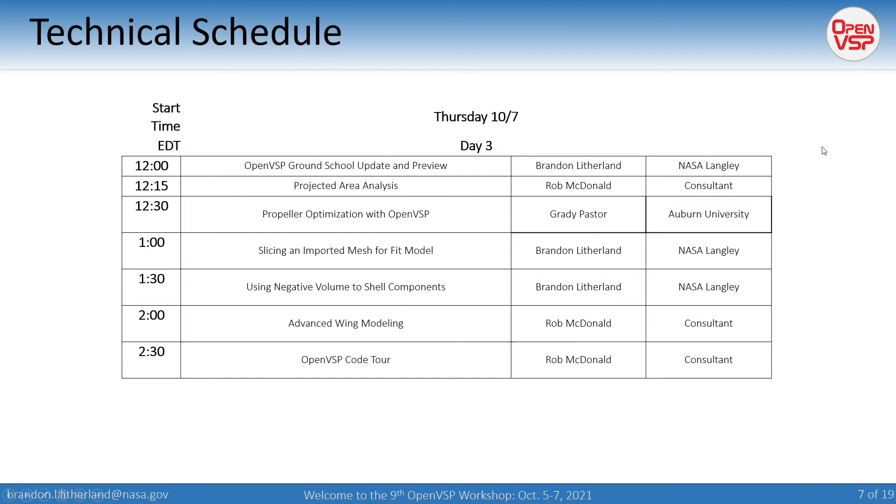And with that, I'm going to go ahead and start walking through the slides, and Rob McDonald is going to take over for an OpenVSP overview and talk about really what it's for, what it does, and where it fits in the design process.

Thanks, Brandon. Can you share your slides through Teams so I can see them live? That looks great. Thank you much.

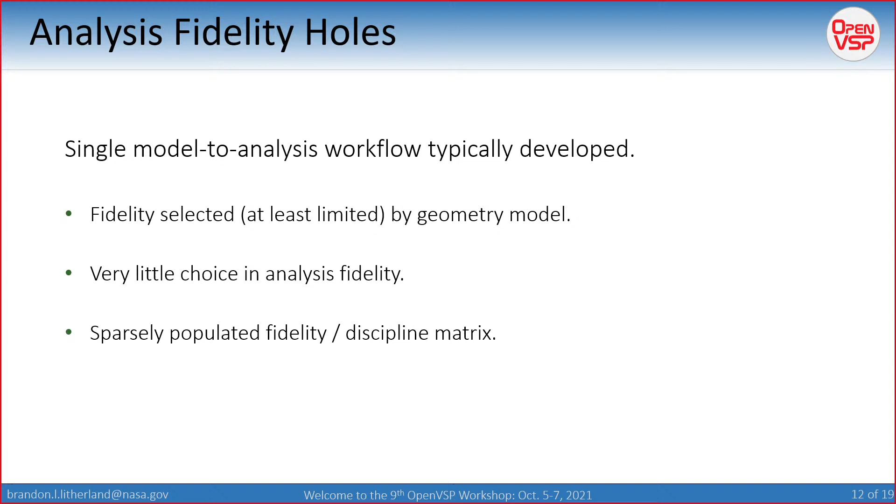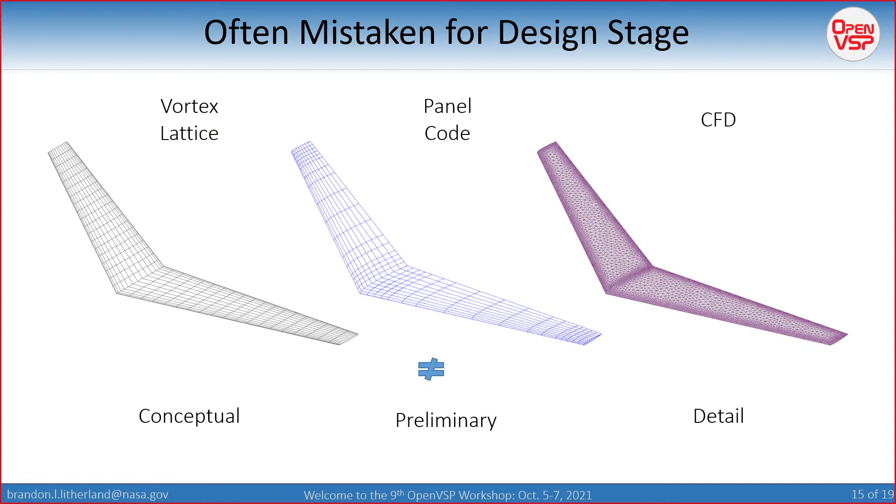Instead, what you should think about is what design phase you're in, whether it's conceptual, preliminary, or detailed design. It's not about how the decisions are made, right? It's not about the fidelity used to make the decision and to inform it. Instead, it's about what decisions are made. During conceptual design, you're making these bulk, big bone decisions, primary wing layout, what are the mission requirements, how are you going to achieve this?

In preliminary design, you're nuancing things a bit more. You're deciding exactly the structural layout. You're nuancing the twist of the wing and maybe the camber of the wing. All the way to detailed design, you're lining up rivet holes. You're doing composite ply layouts. You're designing tooling, manufacturability. So you're making fundamentally different decisions in these processes. That's what changes through the design phase, not fidelity. Fidelity is an independent axis to this process.

And obviously in VSP, we're focused on conceptual and somewhat into preliminary design, but we're also focused on letting you have all of the different fidelity tools that you need to make the decisions that you're making. Next slide.

So OpenVSP is a parametric tool, and we come from a place where those parameters are the geometry truth, right? They are the ground truth. That's really where we start. And so the concept, that idea, this is a wing, this is a NACA 4-digit airfoil, the aspect ratio is 8, right? Those ideas, that is the geometry. And everything else is a representation. And parameters work throughout this process.

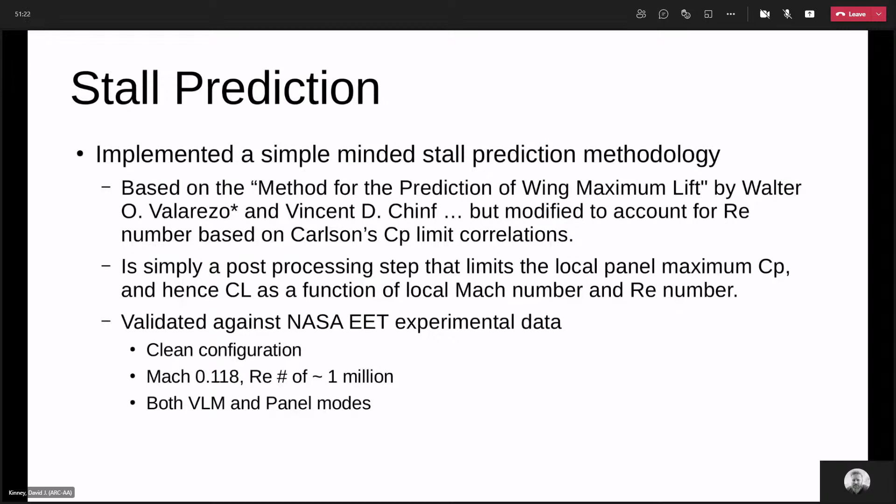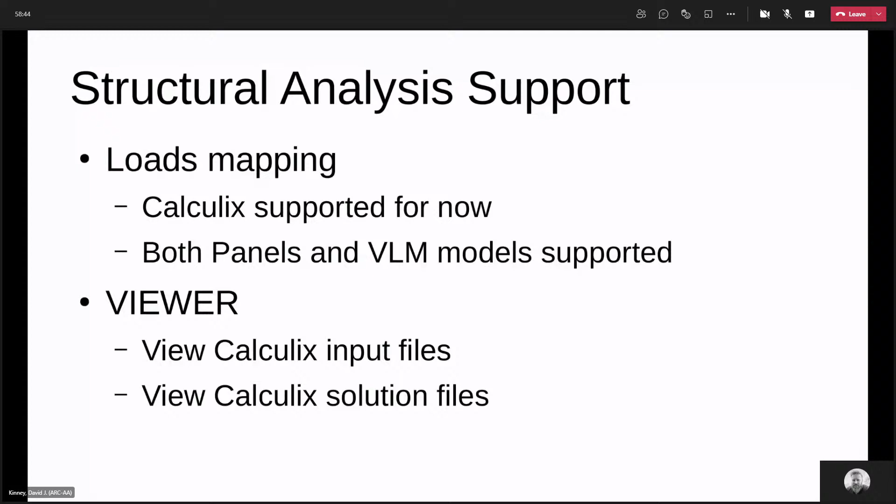So just as an example, grab the EET again. We just went through a default setup, not anything really to compare to here, but just trying to show the process. We've actually done a bunch of internal use of this on other geometries, and it generally does a really good job compared to other codes using Nastran and higher fidelity CFD.

So I modeled up the EET just looking at the wing. Basically skins, ribs, and spars were modeled. I don't know if someone's going to talk about this in the workshop, but if you're interested in the details of the FEM modeling, I'm sure there's a slot for going over that this week.

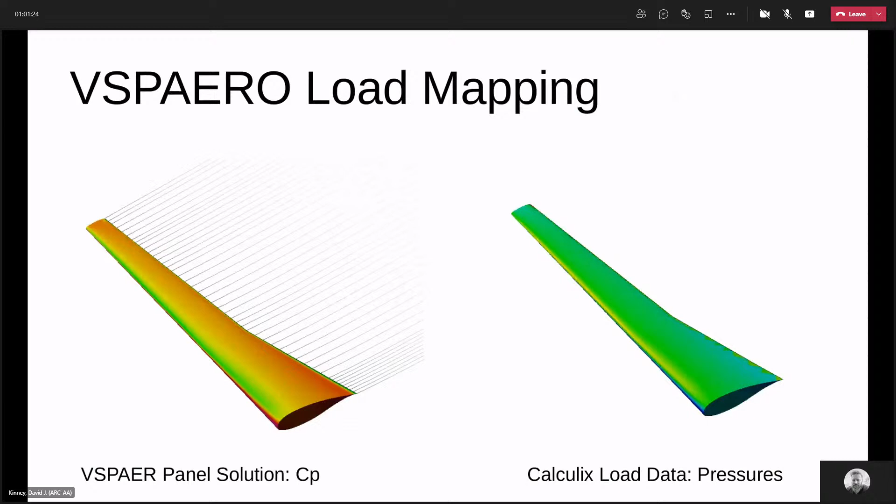Once you've done that and set up a number of other things within Calculix, all of which we've added, like finding the symmetry plane points and adding boundary conditions so your wing doesn't fly away when you apply a load and run it through the solver, there's a bunch of other things we've done to allow you to tie multiple FEM models together.

We've done this with a strut-braced wing, where we had the wing, the strut, and a brace all modeled up in OpenVSP, all modeled within the finite element tools within OpenVSP, and all had loads applied to them from VSPaero, with the structures tied together. We have a number of different tools we'll include here in the future to allow you to do all of that.

So it's a fairly easy process now, at least for a single wing, to run VSPaero. Once you've got your finite element geometry modeled up in OpenVSP, write that out, do the load mapping, and then run Calculix. Presently this all has to be done on the command line, but I expect at some point this stuff will get rolled in, so you'll be able to do this all from the GUI.

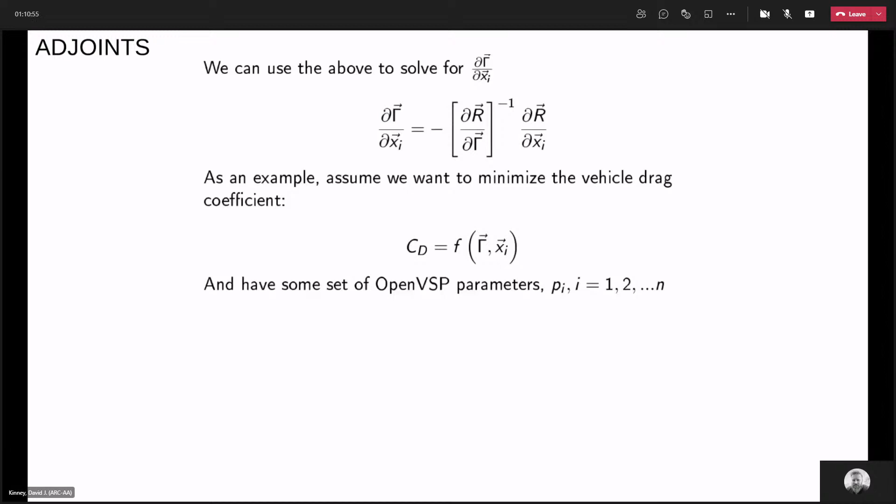So we can take the derivative of CD with respect to the mesh, so dCD dx. That's just, again, chain rule, kind of like we did for the residual. So you get partial CD with respect to x, that's the change in the drag with respect to the mesh change. And then you get partial CD with respect to gamma times d gamma dx, and that's the change in the drag coefficient when you change the solution, times the change in solution with respect to a change in the mesh.

We can basically rearrange that where we can get rid of that d gamma dx, because we solved for that previously when we looked at the derivative dr dx. So we can replace that d gamma dx term on the right-hand side with the dr d gamma inverse times dr dx. And then we can rearrange things a little bit, just combine the first two terms into a term, and we have that dr dx there. So now we have something that looks even more complicated than we started with at the top of this page.

And I'm going to define that stuff basically in the brackets there as psi transpose. So psi is a vector, and that whole thing inside the brackets, if you look at it, is basically a vector times the inverse of the matrix. And so it's a vector, and we're going to call that psi transpose. So we've defined psi transpose, like I had there at the bottom of the page.

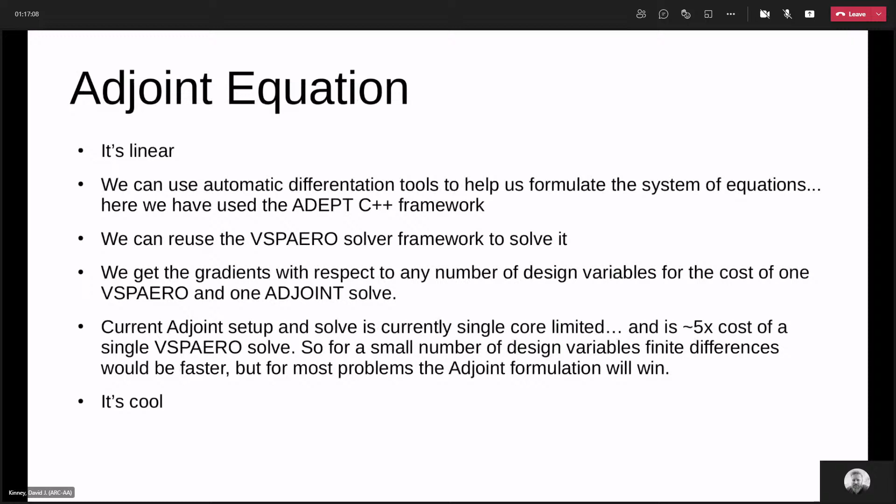So the test case, just a simple wing, incompressible, Mach 0.01, 5 degrees angle of attack. Stuck the CG up there near the nose of the vehicle, so by definition, it doesn't trim. I'm running this in VLM mode. It will work for both VLM and for panel mode. Really, there's no difference in the setup or run, just in the run times; it's just easier and faster to do VLM. Obviously, using the adjoint solver for the gradients.

So the design variables, I have 9 sweep values along the span, 9 twist values along the span, 9 dihedral values along the span. So there are 27 design variables. So if you were doing this with finite differences, you would have to run the solver once at this Mach 0.01 and 5 degrees angle of attack, and then you would perturb all of those design variables one at a time and run 27 additional solutions for a total of 28 VSPAERO runs, per optimization step where you would need those gradients.

I threw together just a simple Python-based conjugate gradient optimizer, and I'm using a penalty formulation to minimize this functional here that I list out. So it's basically CL minus some CL required, which was set to 0.5, squared, plus CM squared plus CD squared, and then A, B, and C are just these penalty function weights. So if, let's say, B and C were both 0, then your functional would just drive CL to CL required, and that would be the minimum of F.

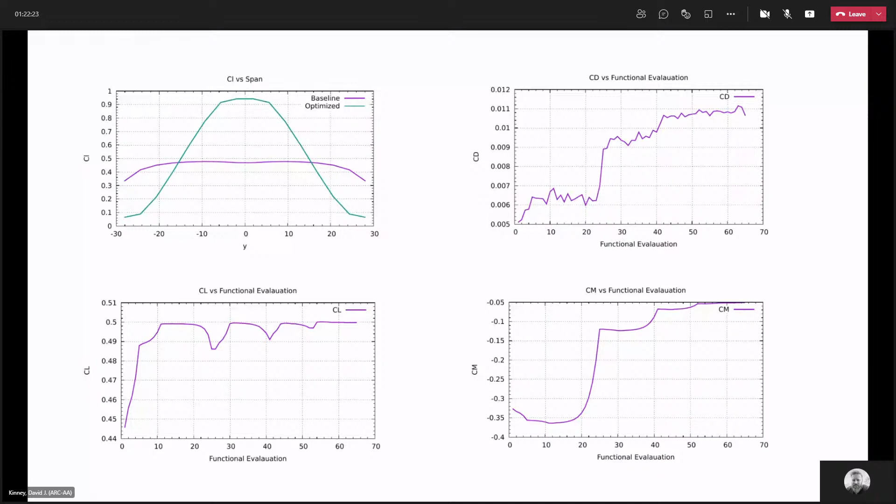I'll let this play a little bit here. So this is just an animation of the optimization process. Within Viewer, you can load in all of the intermediate solutions during the optimization process, at least as I've coded them up for my simple Python script, which we can include in the distribution in the future. Just showing what it's doing. So initially it really goes after the sweep. Then if you look at the tips, it's playing around with both the dihedral and the twist.

This is not meant to be the end-all in terms of optimizers. I just wrote a very simple conjugate gradient optimizer in Python. There's obviously a lot of much better optimizers out there. This code is actually being pulled into NASA's OpenMDAO framework, which I don't know if anybody's going to talk about this week, but OpenMDAO is also open source. It allows you to tie together any number of models in a framework that allows you to do optimization. One of the optimizers they have is SNOPT, what I'll call a real optimizer, where you can actually do optimization with constraints, and not just a simple penalty formulation like I've done here.

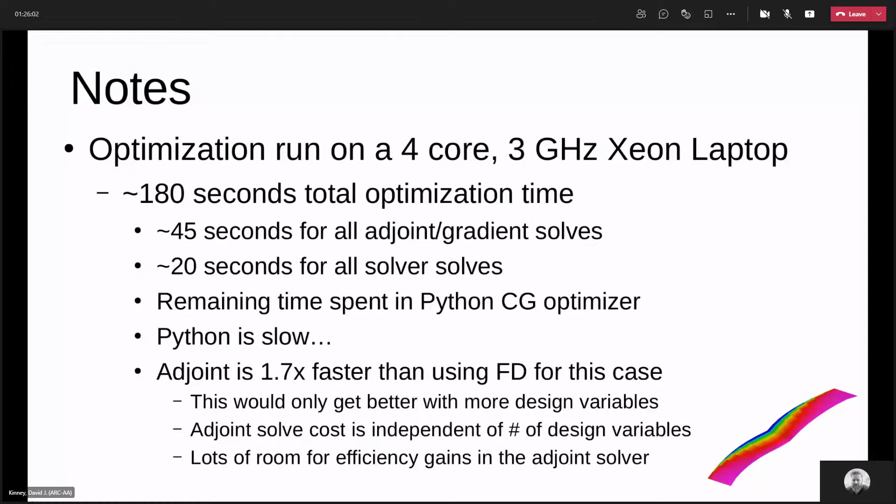Okay. So my final topic, and I think we're doing okay here in time, things that go round and round. In the past, there were 2 ways to model rotors in VSP. The actuator disk model, and it was fast. It's really developed for propellers, not for rotors. And it really doesn't work for edgewise flow.

I mean, you can run it for edgewise flow, and if you're not totally edgewise, then maybe you'll get a reasonable answer out of it. But the theory really was not developed for edgewise rotor type flows. It's based on basically flow coming in normal to the actuator disk, and so anything even at a slight angle of attack is kind of breaking the assumptions in the underlying theory that went into that model.

The other way that you could model rotors was the unsteady analysis. It's not so fast, at least compared to just a single steady state solution. But it works for propellers, it works for rotors, it works for those in combination with wings and bodies. So it's fairly general, and within the framework and theory of the vortex lattice and the panel methods, it seems to do a decent job. But it is expensive compared to running a single VSP solution, say with an actuator disk.

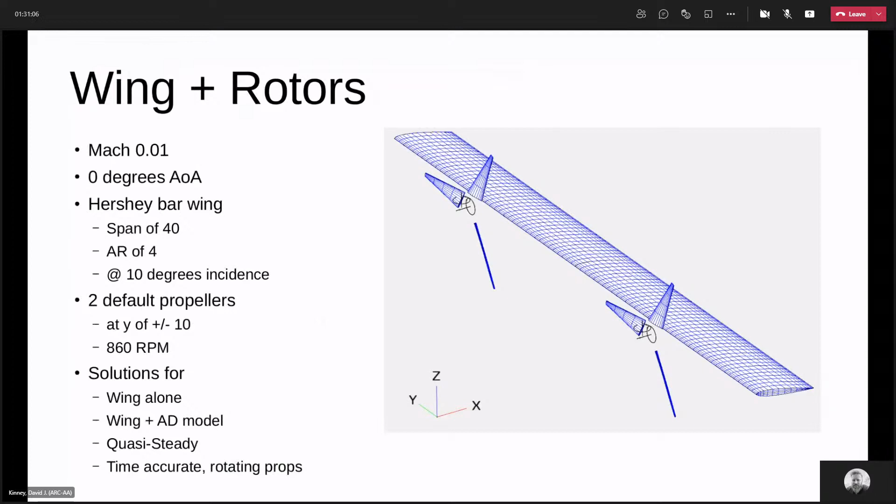I've been playing around with just how many points along the span of the rotor blade you need for these quasi-steady runs. In general, I found it's less than you'd want to run for the time accurate solution, in terms of that pain-benefit trade-off.

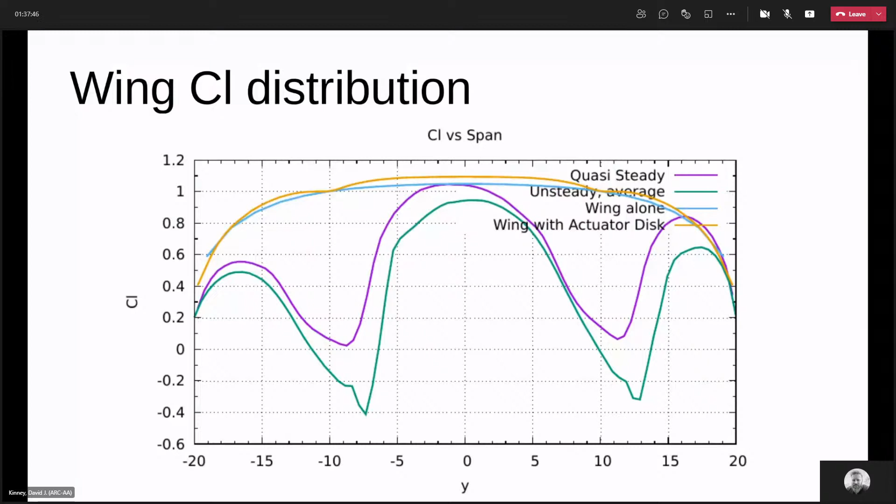If you look at the wing forces and moments, we don't do quite as good as we did for the propeller case, but we're clearly doing a heck of a lot better than we did with the actuator. So the CX, CY, and CZ are within 30 to 50% of the actual values.

But I think you need to look at those as deltas from the wing alone to understand that if you're looking for trends, which I think at this level of analysis and conceptual design is probably what you're looking for, it actually provides you some very useful information. Specifically something like CMY, the trim, it's acting in the right direction. So it's definitely showing the impact of those rotors on the wing in terms of trim, as well as in terms of the forces.

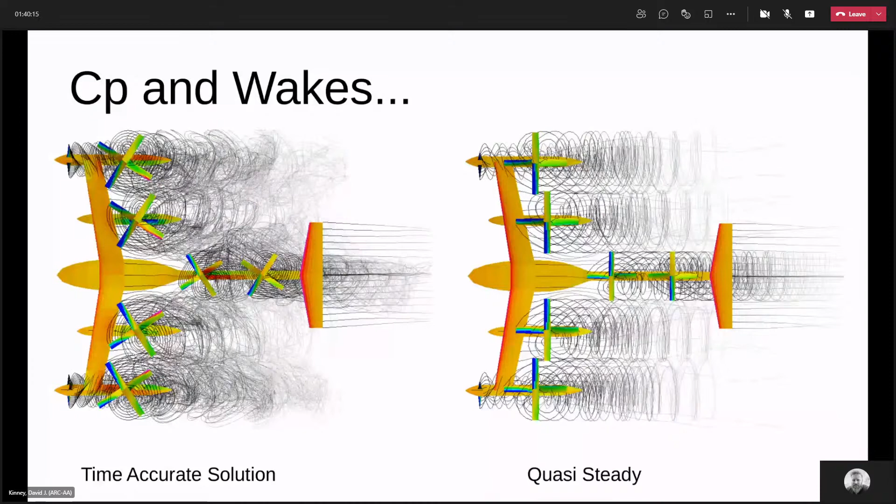From a load standpoint, this is by far the worst solution you've seen today in terms of comparisons. You've got the unsteady average up top, the wing alone near the bottom, and quasi steady is kind of splitting the difference.

But if you look at the integrated force and moments, we don't do bad. You look at CX, CY, CZ, all the trends are actually there, and they're actually fairly close. CZ is off by maybe 50%.

CMY, which is probably the big one in terms of trimming the vehicle and trying to understand the impact of rotor RPMs and how you're going to trim this vehicle, is actually scarily good, probably better than it deserves to be. Again, you want to compare these all to the wing alone solutions. So CM, it's pitching down and it's pitching up, right?

Obviously these are just the forces and moments on the wing. These would be traded off with the thrust and the forces that are occurring, with the delta pitching moment caused by the thrust. So you trim this vehicle out with the rotors.

So that Uber case, 12 rotations, I really ran that one out. It was like 5.5 hours on my laptop, and the quasi steady was 7 minutes. So I think for what you're getting from the quasi steady solution, the trade-off in time is quite worth it.

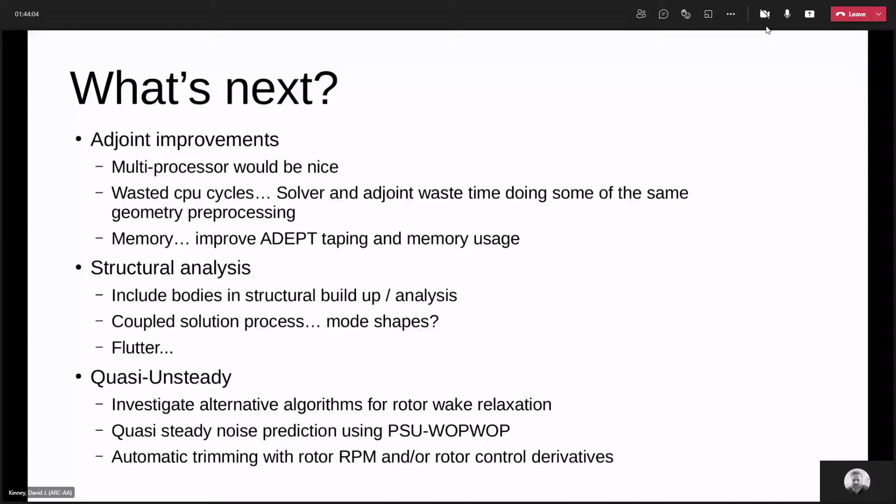So first, what does the CLMax variable do in the input file? Is it still supported given the new stall prediction tool? What should you set that to if you're using the new stall predictor?

Yeah, if I turn my camera on, you'll just see my dog. So if you're editing the .vsp file by hand and you set CLMax to -999, it will kick in the new CLMax. Okay, so CLMax -999. And otherwise it operates the way it always did. Yep, great.

Would you give an answer about the logic of when a DegenGeom file is used, when a VSP geom file is used, and when a tri file is used, and how it picks?

Yeah, so it depends on what's in the directory, and I'm going off the top of my head, so it's probably not perfectly precise. But what it should be doing is: if you've got a VSP geom file, it should take that first - whether that's a Vortex Lattice model or a panel model, it should grab that. If it doesn't find that, it should look for a tri file and load that in. If it doesn't find that, it should look for the CSV file for the DegenGeom. So that is essentially the order.

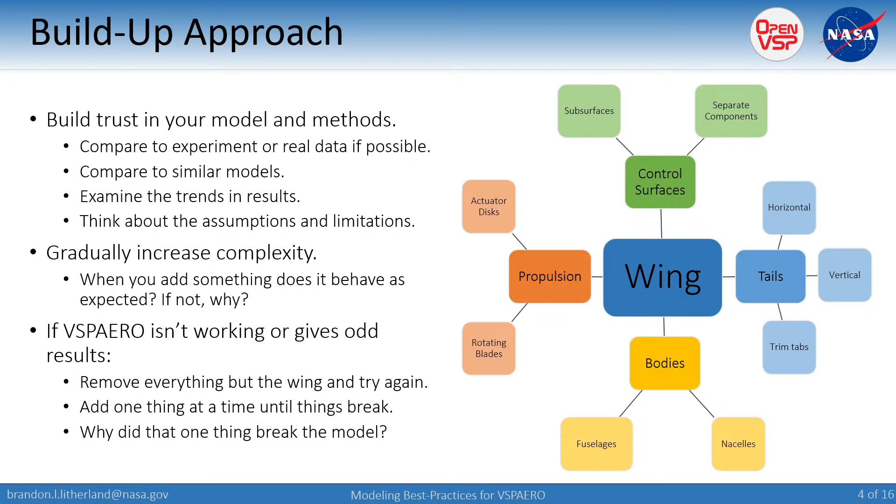So again, if VSP Aero isn't working, it's returning a not-a-number or giving you weird results, take away everything but the wing and try again. Add one thing at a time until things break, then figure out why it broke and what it was about that completely screwed up the model. In some of these slides, you'll find things to look for when you query your model.

As general best practice, you can use clustering to your advantage to improve the solution, or at least give the solver a way to calculate information where stuff is happening. For example, you can give it more points out at a wingtip where you'll have a larger drop off in the lift curve. That's typically going to give you a more accurate solution than leaving everything in uniform spacing. If you have a lot of points, it's probably going to give a decent lift curve, but it will cost more time. This way, you're giving it fewer nodes compared to a completely uniform solution, but still capturing information out at the tip.

So for a single section wing, you can use a root gradient or root strength of say 1 or 2, and out at the tip something like 0.2 to 0.25 is pretty typical, where you can get more information out at the wingtip.

For a multi-section wing, however, you can set the clustering near section breaks so that neighboring cells are similar. You don't want the end of section 1 to have a bunch of tiny high aspect ratio sliver cells and then jump like 2 feet - those two side by side aren't really going to like each other very much. So set these reasonably close together, and add a little more cell density behind something like a propeller, so that where all the interesting stuff is happening on the wing, the solver has enough panel density to capture those effects.

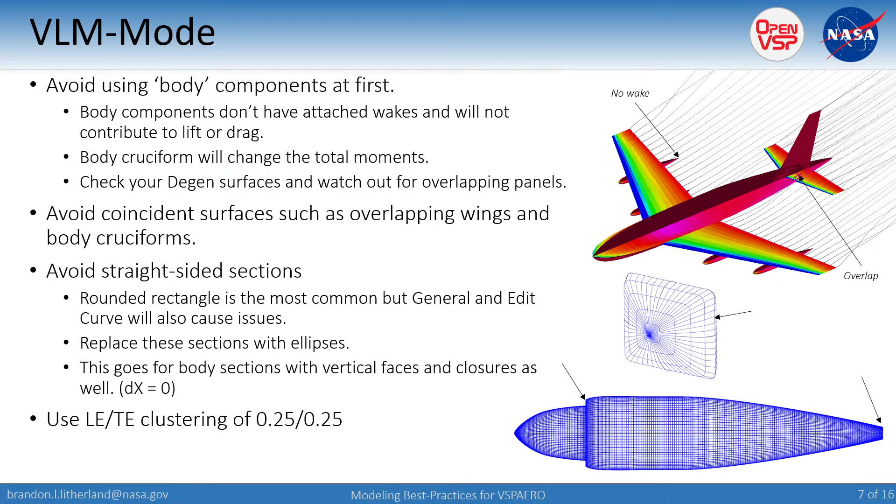But even a very small offset of these distances, for example if I'm working in feet, something like 0.02, is more than enough to make sure these crashes don't happen and it will run just fine. For VLM wings in particular, when you have control of leading edge and trailing edge clustering, use about 0.25 at the leading edge and 0.25 at the trailing edge—that's typically accepted good clustering of points at the leading and trailing edge for VLM mode.

Moving on to discuss panel mode, you'll notice that you can't use blunt trailing edges on wings or bodies. But what you can do to help this along is change native blunt edges to a sharp edge using something like closure or caps.

So you can sharpen the aft-facing body surfaces by adjusting coincident sections slightly—that's more of what we were talking about with that nacelle. Just shift those sections a little bit, and then you should be fine.

When we're talking about clustering values for panel mode, it's usually better to do, say, 0.25 or even 0.2 at the leading edge, and leave the trailing edge value at 1. That way you have some nice distance between the closing section and the next one, giving it a nice sharp edge to attach a wake to.

With the images here, we're looking at a few different ways you can adjust the airfoil. The flat cap that you see is going to cause failure when you try and run VSP Aero. But if you put an edge cap on there, it extends it very slightly—it doesn't really affect the chord length, even though it does just a little bit—but it will run just fine, and you still maintain the upper and lower cambers, upper and lower surfaces of your airfoil.

If you're using closure, you can skew both, or maintain the upper surface distribution by skewing the bottom, but you want to set that to 0. If you skew both, the camber line is maintained. If you skew the bottom, it's going to bring the bottom surface up, but the top surface will be effectively unchanged. It's kind of up to you how you apply that.

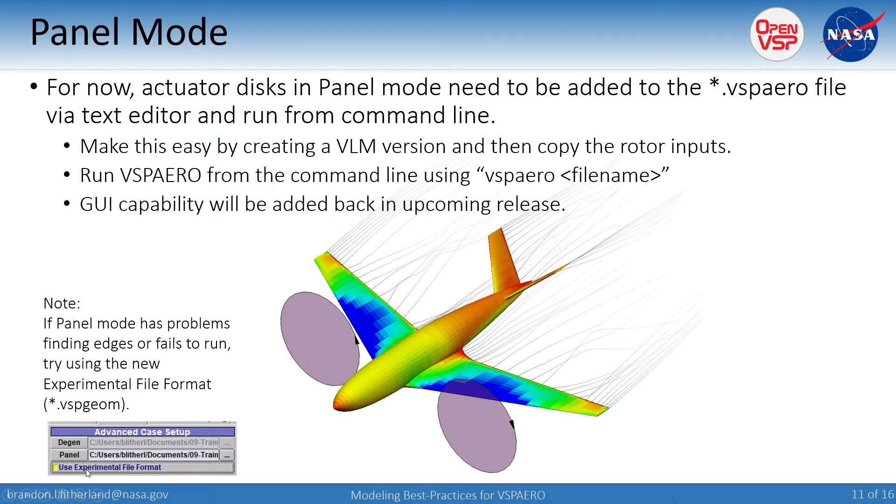Not quite sure why exactly that happens right now. It's more something that we're digging into, but just in case panel fails and you know that it should run, try VSP geom by turning on this experimental file format button in version 3.25.

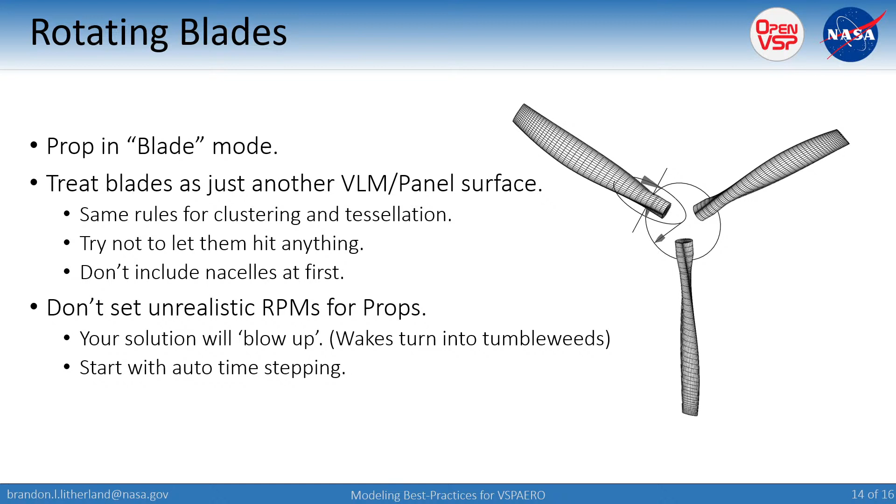So we're here at 2 o'clock. I've got just a little bit to go through here, and then we'll roll into VSPAERO demonstrations. But I want to give you guys some tools that you can use to troubleshoot. And Viewer is really great for this.

So the idea here is you open up Viewer and you take a look at something like the pressure distribution. And you're looking for things like large peaks. You can check the legend to see what those extreme values are, both in, say, the upper and the lower value. If you see things that are completely unreasonable here, it tells you that there is some cell involved in the solution that's causing problems, and you need to take a look at it.

You can also look at the wakes and see if you're seeing the roll-up move as expected, if you're seeing, say, control surface deflections cause the wakes to dip down like they should. And even if something is missing, if you intended to have a tail in the model and then you pop in and for whatever reason the set didn't include that component and your moments look wrong, check the Viewer. Make sure all of the components that you intended to run with are actually in the solution.

Something that can occasionally get brought up is people will look at the Viewer and say, well, why do my control surfaces look like they're in a completely different spot than what I prescribed?

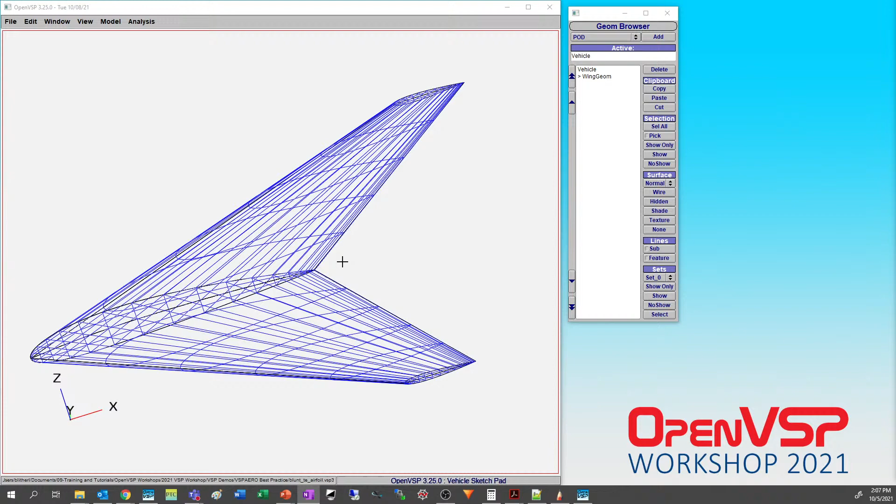In this demonstration, we're going to talk a little bit about where that blunt trailing edge airfoil can come from and how you can avoid it, and we'll do a bit of a live demonstration on how to alleviate some of this. So what I've done here is I've loaded in an airfoil from Xfoil that's basically a NACA 2412, and this airfoil automatically comes out with about a 0.2% trailing edge gap.

You can see that here if you go to the Modify tab. The closure automatically calculates what this is, so it's relative 0.00252, but in reality it's about 1/100th of a foot in the length units that I'm using right now. So it's definitely there.

Kind of like we talked about in the presentation, we can change this from flat, and we can either go to round, which lofts it around like that. But if you want something nice and sharp, you can go to edge, you can go to sharp. You can see there's a slight difference in how exactly these little tessellated bits are being applied, but edge is usually pretty good.

And then you can do things like adjusting the closure. So if you don't want to play with the length, where you can adjust how this is, or even set it up or down using offset, let's say we go back to flat, we can then adjust the closure here, and instead of 0.01 in absolute thickness, we just drag it back to 0. You can see that it adjusts the upper and lower surface and collapses that down to a single point. That is now a sharp edge all the way along back to this point.

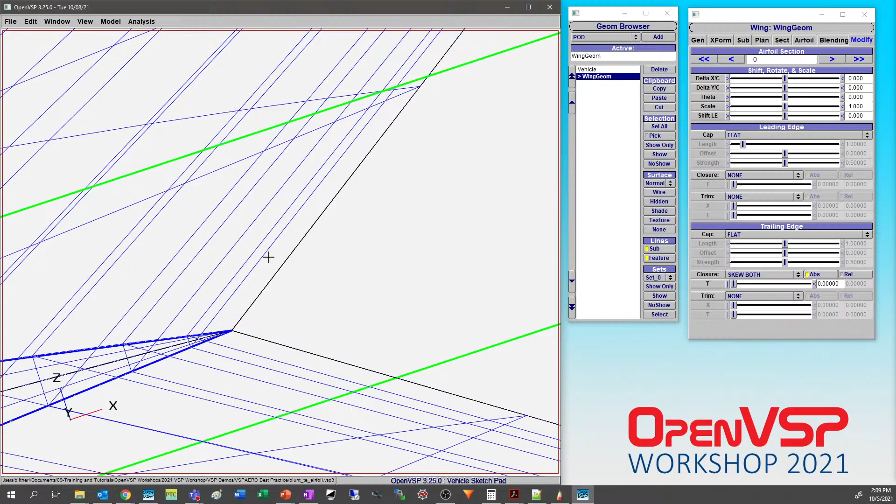Let's see. In the meantime, we can take a look at one of the others that I wanted to show you. This is a bit of a dual demonstration. So we've got a basic wing here.

I've given it about 21 sections, and under the plan tab, we're going to make sure that our leading edge and trailing edge clustering is good. And then we're going to give this some clustering out at the tip, so let's set that to 0.25. And very quickly, we're going to run VSP Aero in VLM mode for just 1 point, just to get the point across. We don't necessarily have to set anything else up. We're going to use the shown set and run it.

So it's going to run real quick, no problem. And what we'll notice here is the loading looks good, but you'll see that there's this gap right here in the middle. Now that's perfectly normal, because in VLM mode in particular, you'll see that each of these loads are being calculated in the middle of the strip. And so it's treating these as the one on the right side and the one on the left, so it's not giving you any information at all about this in the middle.

So it's okay if you see this and that these lines aren't connected. Just know that it's plotting all of these points together in a line, because that involves the right-hand surface of the wing, the other side's the left-hand surface. So don't be bothered about that little guy.

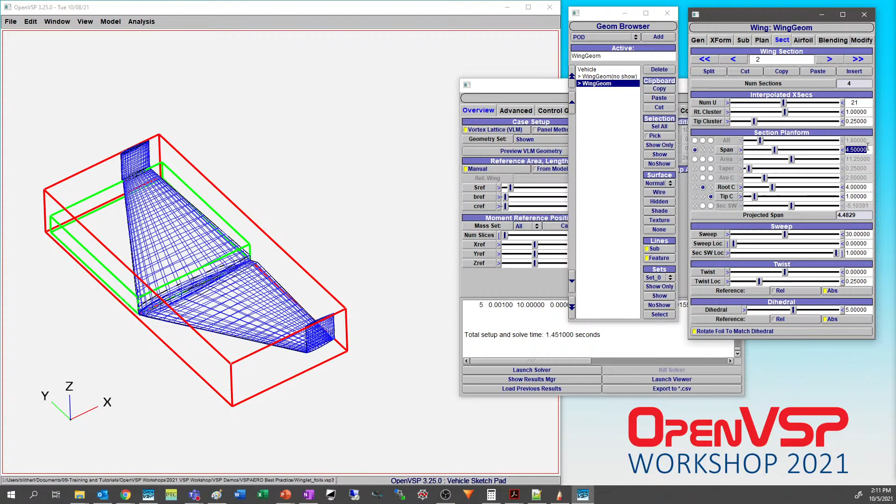Now if we screenshot this to keep it in mind, and put that over here for now, we're going to do another demonstration where we do some winglets. I'm going to show this, no-show the other one, and bump the size of this out a little bit so we can watch what happens when we have winglets on this.

So if I press R and pick a point to rotate around, that's what that looks like. And that's not going to work very well.

So if I were to use the shown set and launch the solver, you can see it's already having a hard time, lots of iterations to try and get down, and you'll see stuff like this. This is an indicator of a bad solution, because there are these giant peaks where something has gone very wrong. That's one of the things you can use to identify where these problems exist.

So if we take a look at that in the viewer, I'll bring this over here so you can see what's going on. If I show the pressures, you can see there's this really nasty pressure spike right over here, so it's causing all sorts of issues.

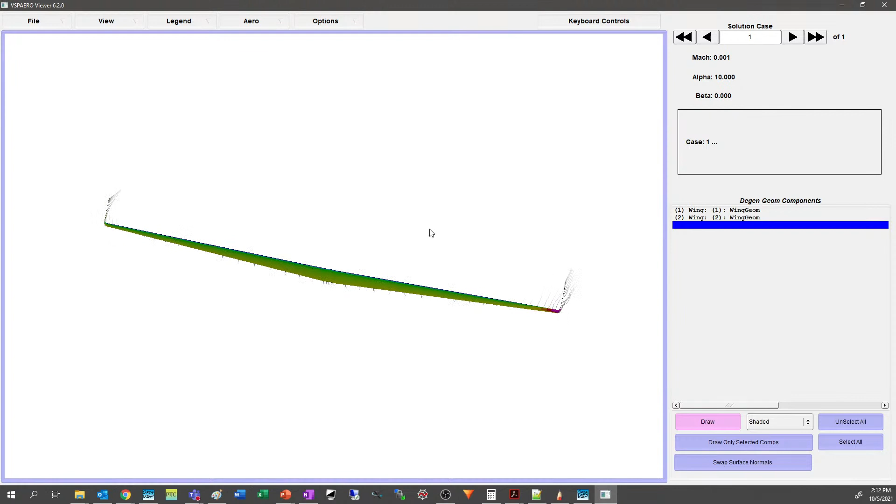If we show trailing wakes, I didn't set it to where it should extend these further out, so you can set far distance to something like 100 to really get this to roll up. But on one side it seems relatively well behaved, while on this side it's actually throwing them outward. So already you can tell there's something wrong with this.

So if we come back in here, rotate the foils, and take a look at this again, now you can see that the foils are all rotated to be effectively normal to the surface here, following the dihedral, bending around, and this has some thickness. You'll notice out here in the corner that OpenVSP is trying to make sure these are all normal, kind of blending it in as you move along. That's okay—I know it's not the absolute full thickness of the airfoil that's supposed to be there, but it captures pretty much all of it.

So if we go ahead and launch again, we should get something that looks quite a bit better. Now this is more like it. You see we don't have any of these weird negative peaks down at the bottom. We have a section of the wing where there are a whole lot of points being computed effectively out at the edge of the span, but we knew that. Still, you can see that the distribution is relatively similar.

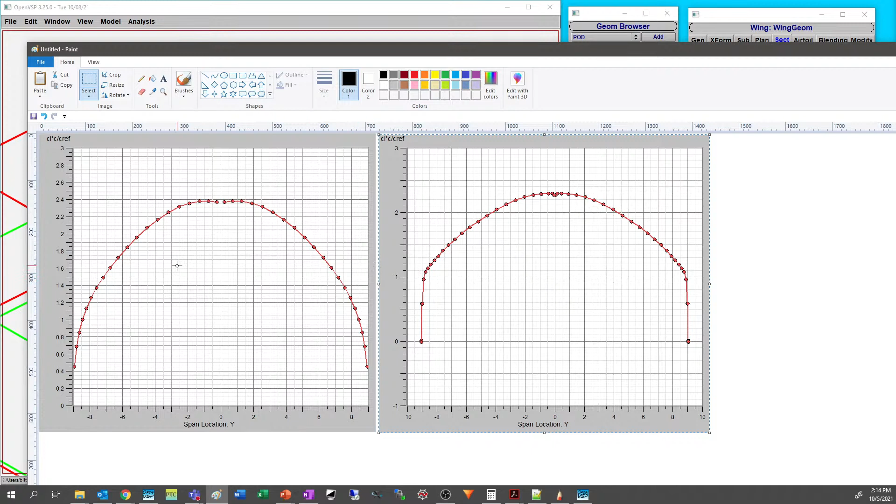And if we were to launch the viewer and take a look at this as well, you'll see that the pressures are all nice and even, and the trailing wakes are all well behaved. Looking at that, there aren't any weird pressure spikes, and if we take a look at the contour legend, this is all order-of-magnitude expected behavior, especially here in this primary region—we're only going from about 0 to a ballpark of -2. So everything is looking good there.

Let me back out of this a little bit and clear up my workspace so we can talk a bit more about this.

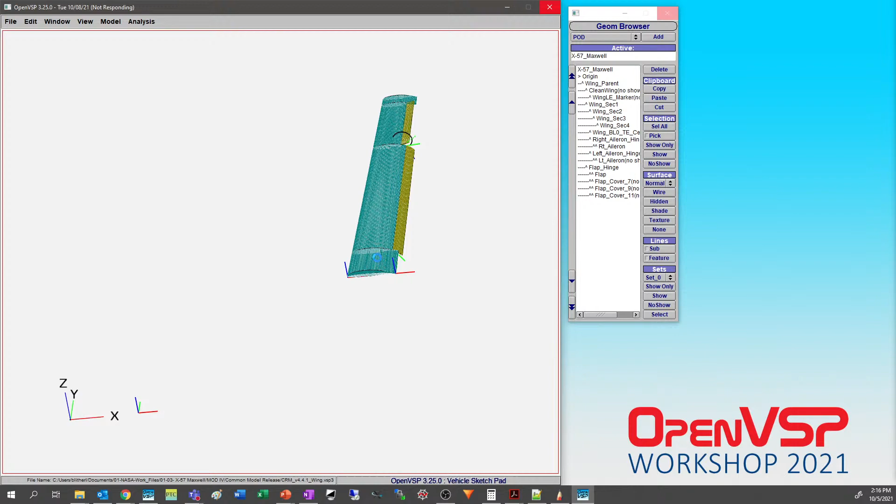Part of the reason this model takes so long to load into OpenVSP is because there are a whole lot of propeller components in here, and it has to build every single one of them. So there we go, now we're in business.

While we're at it, let's go out and take a look at this tip nacelle, and we'll point out some areas that will cause problems in the solver. If we start here and show only, you'll see there are vertical faces both here on the inlet to the motor surface. There are blunt faces down here on the back of the spinner, and blunt faces in between the motor.

Even in the simple version where you have all of this combined down to a single nacelle, these vertical faces exist. So you want to try to avoid that by coming back to this section and picking a cross section. Here we go, going out to the last cross section. So the closure's a point, and you see the delta X is like 0 here because this is all built out of a stack.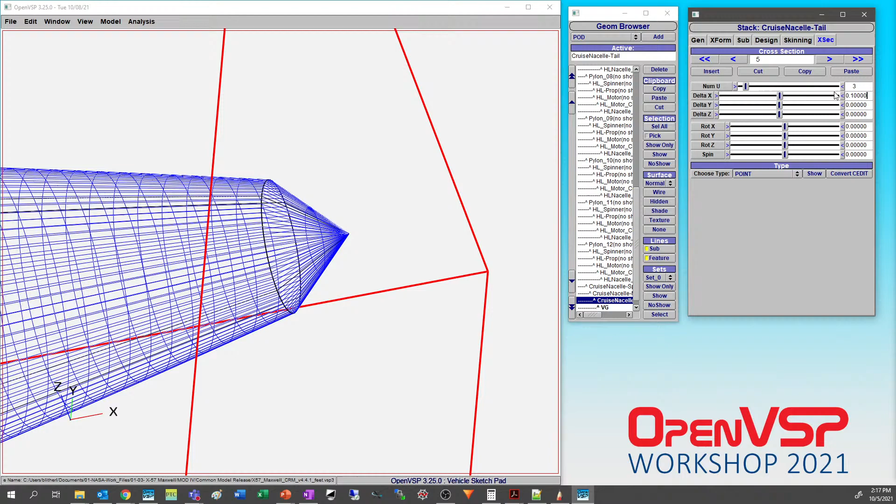If we stretch that out just a little bit, something like... let's give it half an inch. That might even be too much. Something like 0.1 or 0.05 is going to be plenty. That's going to run in panel mode, it's going to run in VLM mode, it's not going to give you any issues.

So those are a few things you can do to identify issues with your solution. You can look for errors in your model. Those are some ways to avoid things that will cause problems in your vortex lattice or panel solutions. Really, it's where you should start when troubleshooting these more complex models. Build things from the ground up, and build your complexity as you go.

Don't start with something like the X57 detailed model and expect to just turn on all of the propellers and get something meaningful out of the solver, because chances are that's not going to work. There's too much going on. In fact, this detailed model is more intended for building up either an outer mold line for component layup, or for higher order CFD where all of these different components can spin.

So if you're just looking for something to run through VSP Aero, by all means pick the simple one, and even then you have to refine it a little bit.

Let's see, so it's about 2:20. I tried to shave a little bit of that time back so we had time for a little break before M4 Engineering jumps on and starts to give us some updates to their work over the last year or so.

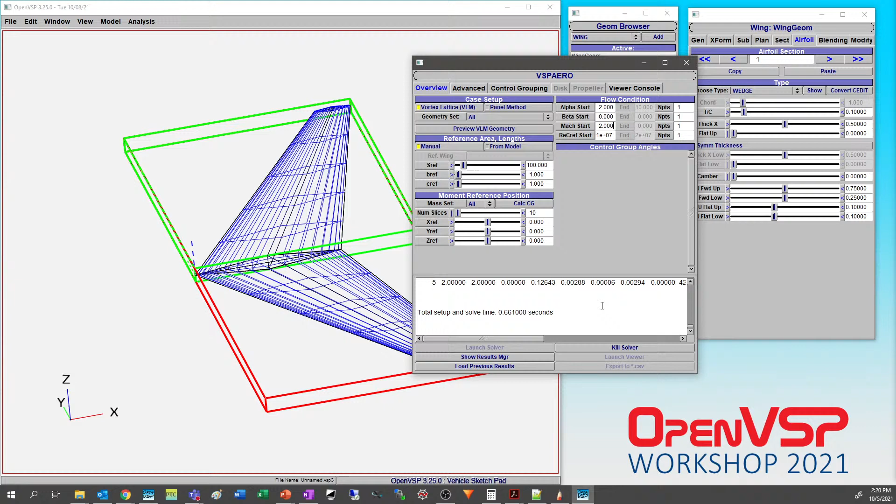So let's maybe set this to 2, set this to 1. Just for fun, let's say Mach 2 - I know someone asked about a supersonic case. Not really sure what's going to happen here, but let's run it anyway. Yep, so it ran. Whether that's particularly meaningful with such a poorly resolved model, I don't know, but it will work. VLM mode runs supersonic cases, so go for that.

All right, let's do a propeller case, and in this one let's just do an isolated propeller so it runs a little bit faster. We're going to add a default propeller, and let's take this down to something like a 2-foot diameter, and we'll run.

Actually, there's a better way to do this. Let's open our examples here. We're going to do isolated rotor, and we'll open this one. This is an example that comes with OpenVSP that Dave Kinney set up for demonstrating this mode. You can see it's a 5-bladed prop with a diameter of 10, relatively simple. We'll go ahead and jump into VSP Aero.

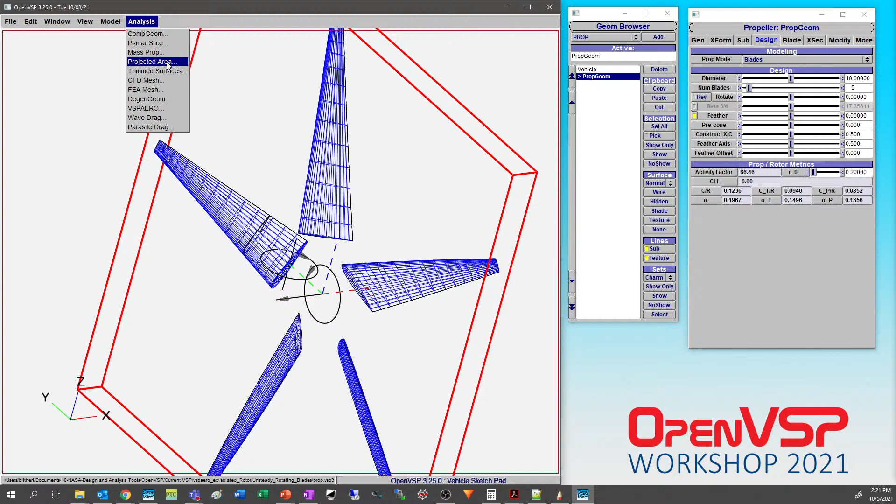Under the Advanced tab, you'll see you turn on rotating blades. We'll give this a few more CPUs to make it run quicker. And you'll notice that there is both a free stream velocity, a reference velocity, and a Mach reference.

As has been asked in the Google group numerous times, what's the difference? For slow free stream cases and even zero free stream cases, you need, either for actuator discs or in the case of rotating blades, a reference velocity so the solver has something to normalize everything. By turning on VREF, you're telling it the reference velocity it should use for calculations, and then it applies the free stream using a second value.

Because this is all potential code, you can think of the reference velocity, the Mach number, and even the Reynolds number as disconnected from one another. So it's up to you to make sure all of these are scaled appropriately. We'll go ahead and give it some wake nodes and maybe some far field distance to make sure we capture enough of the wake.

Then here under the propeller tab is where you start playing around with some settings. You'll notice Dave talked about this 860 RPM. If you have multiple rotors, you can tell it a uniform RPM and it will apply it to every single one of these. You can either have auto time stepping or set the time steps accordingly. For this, let's set it to auto time step, back it off to say 6 revolutions so we don't spend all day doing this, and make sure all this stuff makes sense.

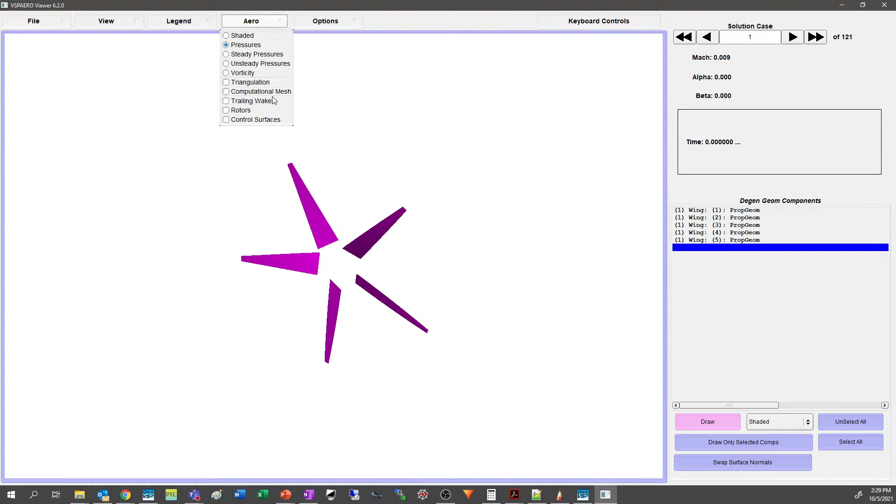Very quickly before we jump on and let M4 take over for their talk, we'll take a look at the solution in the viewer. We'll throw some pressures on there and some trailing wakes, and notice that we have 121 of these solutions — every single time step is included, and you can step through these, or as the wake advances, hold this button down and it'll animate a little bit.

But the longer it builds up, the more information it has to keep track of, so you'll notice it starts to bog down a little. Just fast forward all the way to the end if you want, and you can see the fully developed wake here in the background, showing how all this is behaving. Now, if you run this and start to see this wind up into a nasty tumbleweed, or see it bouncing all over the place, chances are your time stepping is wrong, or you have an improper resolution on your blade. So beware of that.

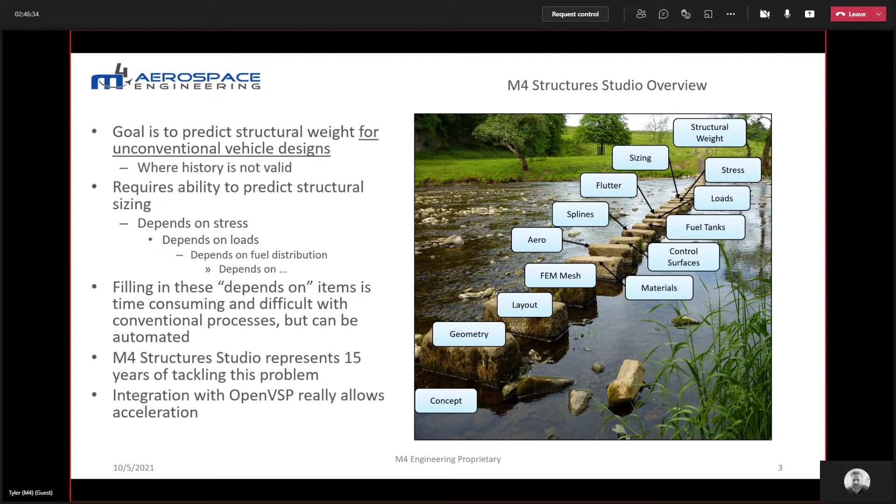Okay, so just a refresher for folks, and again, I'm going to go through these quickly. M4 Structures Studio is a software that we've developed in-house, primarily for predicting structural weight for unconventional vehicles, and we've integrated this tool with VSP. So this allows you to bring in VSP geometry and rapidly set up detailed structural analysis models for structural weight prediction.

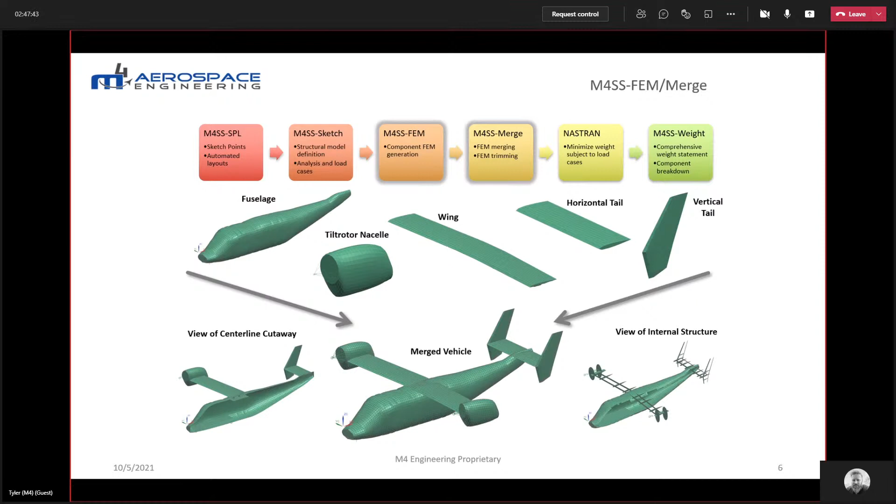And at this point, you're basically ready to run Nastran. So you put that model into Nastran and you'll run, for example, a design optimization for a Solution 200 type study subject to load cases and stress constraints, and generate your sized vehicle. And then once you're done with that, you'll bring that back to our weight tool where you can generate a comprehensive weight statement. And this is a very detailed weight statement that allows you to slice and dice the weight by components and custom groups if desired.

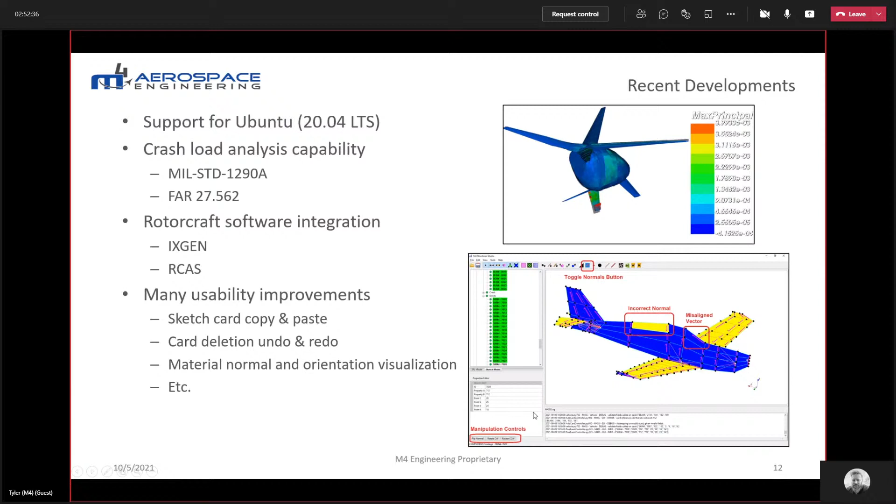And really this is using a modal response representation of the Structure Studio model that gets input into RCAS along with a templatized file for the IXGEN blade details. And all of that will feed into RCAS, and you can run a simulation within RCAS and extract those loads. So if you wanted to get rotorcraft loads out of RCAS, you could do that, and then bring those loads back into Structure Studio and resize your fuselage representation.

I guess a key thing to point out here is that we are not trying to reinvent RCAS or any tool like that. We're basically creating an integrated capability to bring these data into RCAS. The user still has to define all of their own load cases on the RCAS side of things. We don't provide any utilities for that.

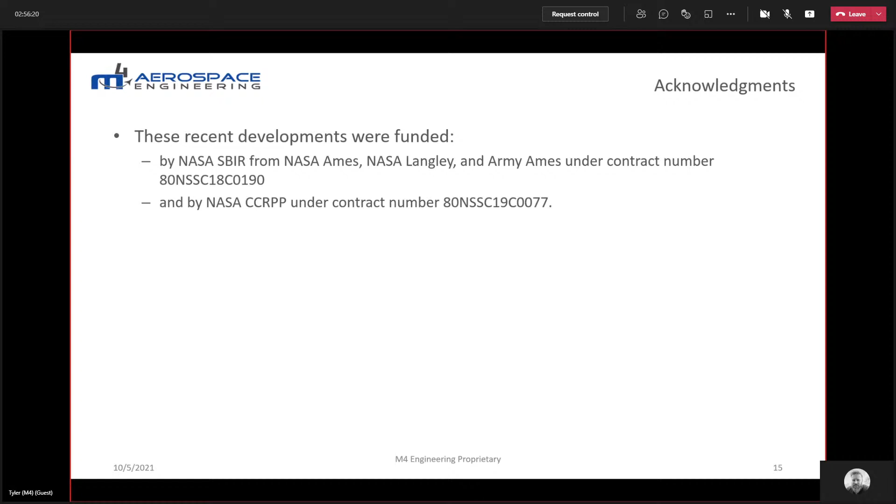Okay, thank you. Let me just share my screen. All right, can you see my screen? All right, so I'm just gonna, how do I fix this? All right, there we go.

So I'm gonna be doing a live walkthrough of how to create a model in Structure Studio, and I just wanted to go through an overview of what I'll be doing before I do that live. So the first step is to import an OpenVSP vehicle into M4 Structures Studio. Then I'm going to lay out sketch points on the OpenVSP model, or on the OML, and then once that's done, initialize the sketch model, and that's the main model in M4 Structure Studio, where the user will have to define all the

components via cards. Those cards are material and property cards, structural cards, aero cards, optimization cards, and then once you've defined all your components, you specify how all those components will be merged together, and you do that with merge cards. And then you can make all the analyses you want by defining load cards. In this example, I'm just going to be doing a normal modes analysis as a simple analysis.

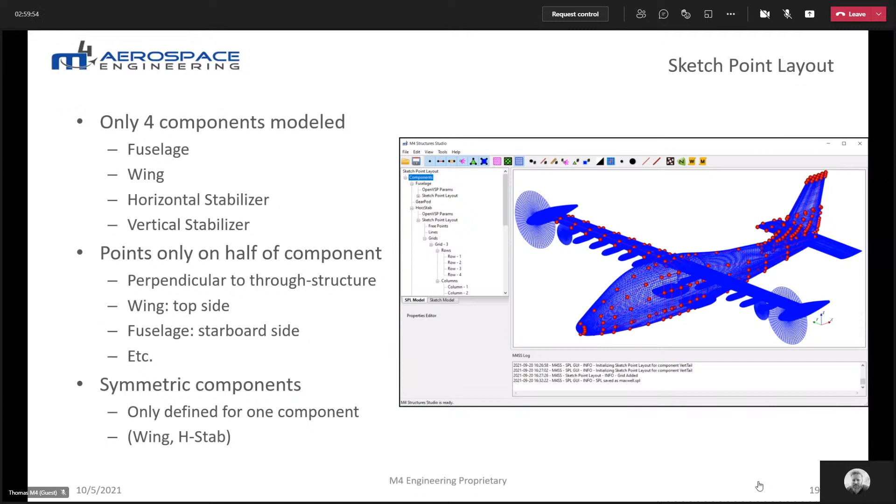When you're doing this, you only lay out sketch points on half the component. As you can see, on the fuselage the points are only on the starboard side, and on the wing, it's only on the top side. I'll get to why that is in a bit on the next slide. Additionally, for symmetric components, you only have to define it for one of those symmetric components. So that wing, I only have to define it for the starboard wing there.

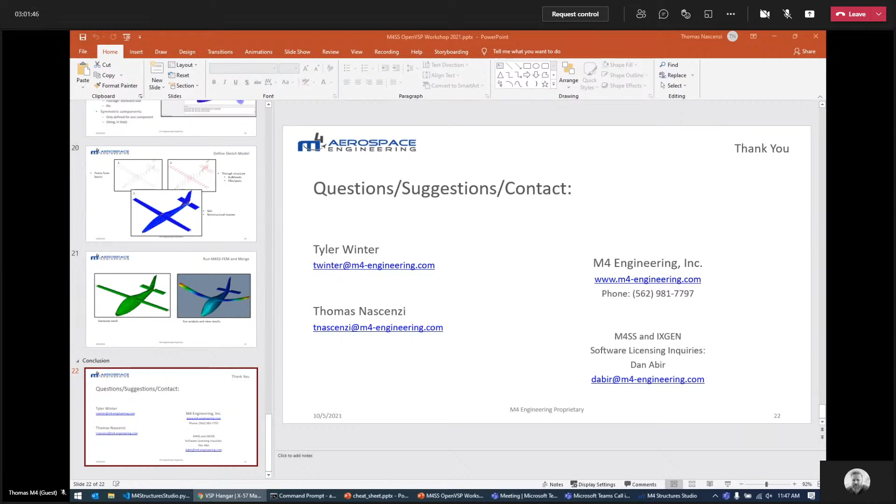So the first thing I'm going to do is download the Maxwell. I'm going to search for it. You've got to download the simplified version. And then I'm going to put it in its own folder, so it's nice and contained.

Then I already have M4 Structure Studio open, and this is kind of what the GUI looks like with nothing loaded. Thomas, we're only seeing your PowerPoint screen.

Oh, I think what screen was being presented changed. Let me fix that. Is this better? All right, good.

All right, so yeah, I downloaded the X57 Maxwell from the OpenVSP hangar. I created a folder and just put it in it, and then I've launched M4 Structure Studio.

So to import the model, you can just drag the VSP3 file into M4 Structures Studio. It takes a little bit to load it, but as you can see, we have the OpenVSP model here in M4 Structure Studio, with all the components on the left.

And you can change how it's visualized too. You can view it as a surface, or with the hotkeys, as a wireframe. I stick with the wireframe.

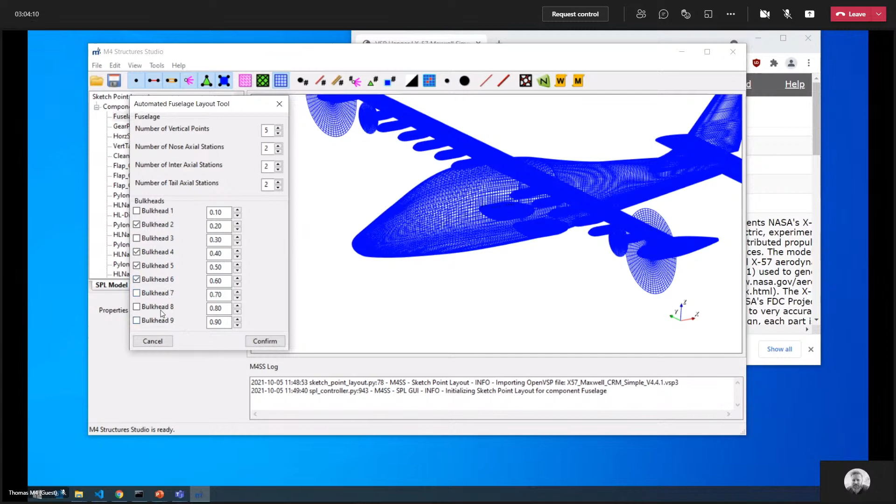And then you can choose a number of options. The main one I'm going to focus on is where the bulkheads are placed, and you can choose what parametric value you want the bulkhead to be placed at. You can change these up and down. I'm just going to click through some of these to choose where I want to place the bulkheads, and then I hit confirm.

As you can see, all these sketch points have been laid out on the fuselage.

One thing I'm going to do, since that automated fuselage layout tool is just a starting point, is go in and change where these sketch points are. So one thing that models in M4 Structure Studio tend to like is not to come to a point like this.

So I'm going to shift this grid of points aft slightly, so they don't come to a point. I'm going to go to this grid component on the left, and I'm going to change the four corners of it. So I'm going to change the U1 value to 0.1, and then the U4 value to 0.1. That shifted the whole grid back ever so slightly, so now instead of coming to a point, we have these 5 points here.

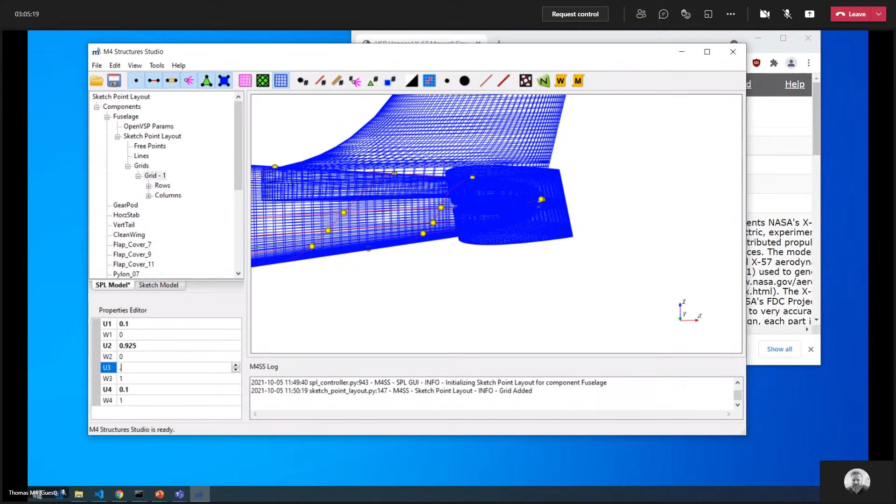And then I'm going to do the same thing for the aft. I'm going to change 2 to 0.925, and 3 to 0.925, and then same thing at the back, so you can see it better, not coming to a point.

All right, so that's all the sketch points you need for the fuselage. And those sketch points, again, will be used to define structural components and various other things for the fuselage.

I'm going to look at the wing now. For the wing, I'm going to use the XY sketch plane. So looking down on it, that'll let me define ribs and spars on the XY plane.

So if I go to the clean wing, I'm going to use the automated wing layout tool. XY plane, and pretty simple GUI right here. I'm going to choose 9 ribs and just 2 spars. And then I'm going to shift these, which are the parametric coordinates for the leading and trailing spar, inward a bit. So, confirm. As you can see, we now have all these sketch points placed on the wing.

So one thing, I mentioned I wasn't going to model these nacelles, but something that the user is probably going to want to do is have all these sketch points on the wing line up with these nacelles. So I'm going to do that real quick.

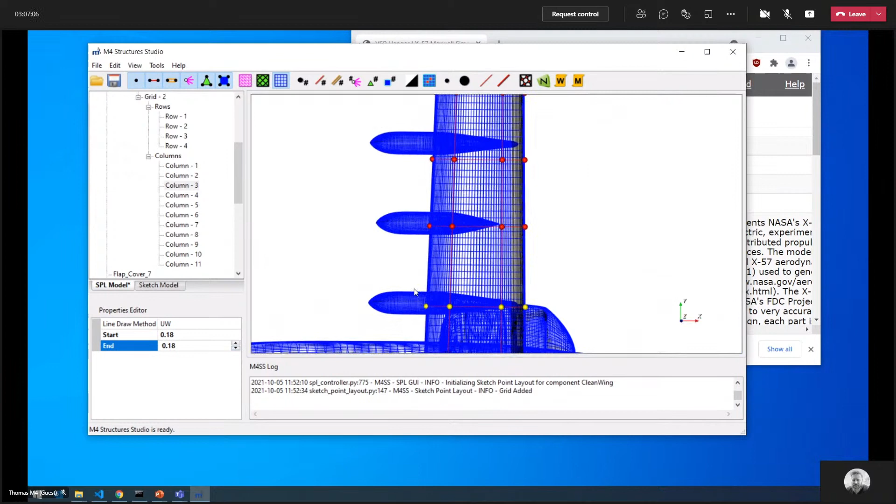So I can go in and change the various columns of sketch points here, and I can move the one end of it up and down. I'm just going to move this one down a bit so it lines up. That one looks fine.

These sketch points, move them up a bit. These up. Same with these. Not being too precise here. And then it looks like I have one too many here, so I'm just going to delete this line of points. Delete that, and then move this one down, and then these two points out here are fine.

All right, so now that the wing's done, I'm not going to do any more work on that in the sketch point layout tool.

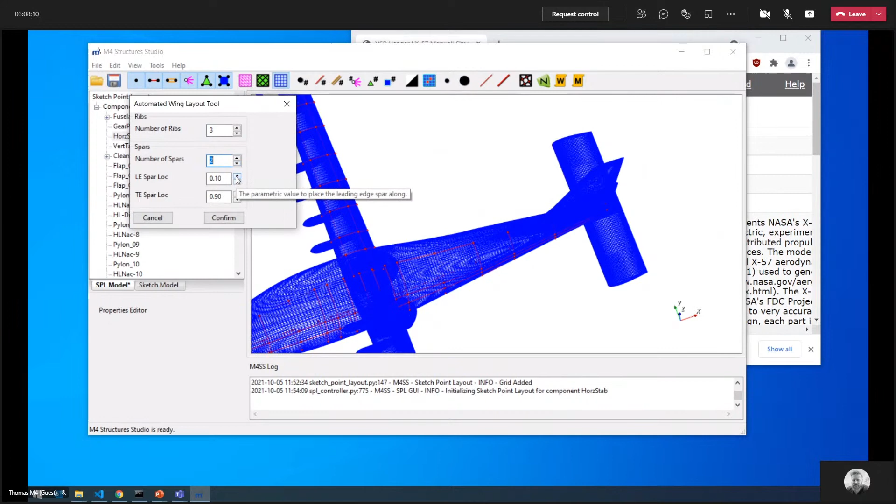So I'm going to shift this grid like I did for the fuselage. Let's move it up so it's only really capturing the wing part of the lifting surface.

And then I'm going to quickly space out these points by right-clicking on the columns tab and using the linear spacing tool. This lets me define how many columns I want, so I'm going to use 4, and then I'm going to space it with their XYZ value. You can either space it so they're all evenly spaced in the XYZ coordinate system, or space them evenly in the OpenVSP UW coordinate system. So XYZ, now I have these 4 columns evenly spaced.

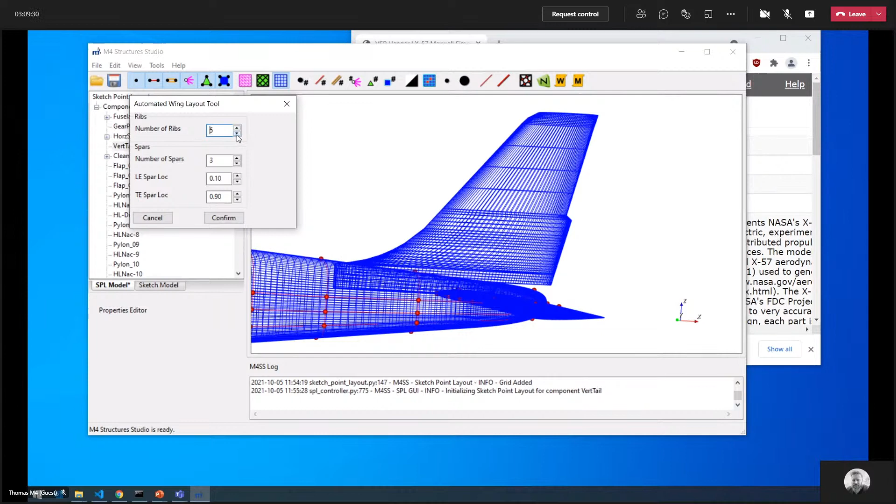That's good for the horizontal stabilizer. Now for the vertical tail, I'm going to use the automated wing layout tool again, and I'm going to use the XZ plane. I'm going to do 5 ribs, 2 spars, much like the other components.

And then again, I don't really want to model this little area down here, so I'm going to shift the grid up. Right, there we go. And then I'm going to space out these points differently too.

So I'm going to use that linear spacing tool again, 7 columns, and I'm going to have them spaced with the UW, and those tend to match the discrete airfoil sections better. All right, there we go.

And then if I show all, to extents, there is the complete sketch point layout for the X-57 Maxwell. So the next step is to actually create the sketch model.

So we're going to go up and do initialize sketch model. First you actually have to save the sketch point layout, so I'm just going to call it Maxwell, and save it.

And then you can see the 4 components that we defined sketch point layouts for appear here as tabs. And there's also some options on what cards you want automatically created once the model's initialized.

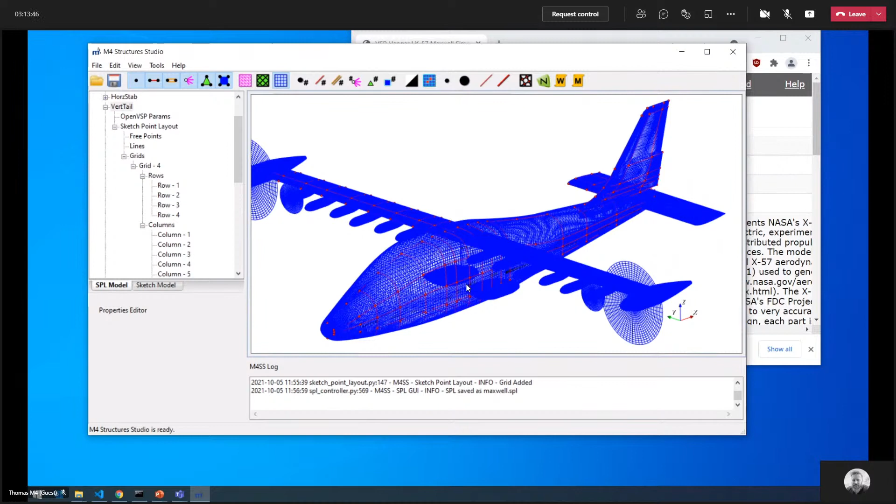And it will also automatically create all these cards that you see now. So then, as I was saying in that previous section, material cards were automatically created for every component, and then different property regions created. As I showed you, I chose composites for the fuselage, so you can see all these different property regions for the fuselage. And then for the wing, you can see these property regions, which have those lower and upper bounds for optimization. So each of these sections could have a different thickness value, different gauge when being sized.

So these are just the automatically created cards. Generally, you're going to have to go in and change some of this, as automation never does exactly what you want.

So the first component I'm going to focus on is the fuselage. I'm going to show only this and snap to. This basically shows only this component and snaps the camera to view its sketch plane.

One consequence of flattening the nose and tail out is that the structure is not closed here. So I'm going to add some beam elements there to close off the nose.

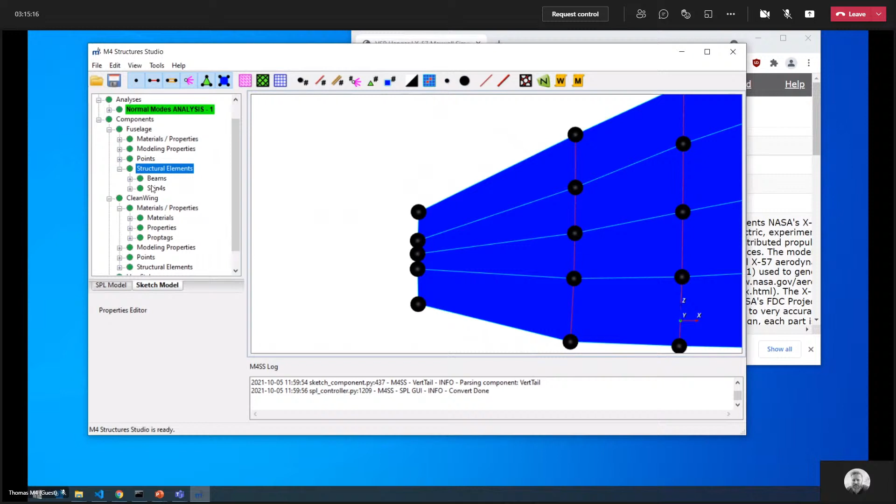So I'm going to go to structural elements under fuselage, beams. I'm going to open the beam wizard. This basically helps you facilitate creating beam cards just by clicking in the model. So I'm going to choose what property region I want these new beam cards to have. Doesn't really matter.

And then I'm going to use the paver multiple. This lets you create multiple beam cards at once. So you choose the starting point and the ending point, and you click. As you can see, it created this red line between all 5 of these points.

All right, I'm going to do the same thing on the aft. Paver multiple, click on the bottom point, click on the top point, click, beam cards created.

Another thing I want to do is, all these red lines essentially represent bulkheads, but I don't want this many bulkheads, so I'm going to delete a few of them. Done with that.

So I'm going to delete these 2,000 and 3,000 bulkheads. Delete.

Delete the 5,000 to 7,000 bulkheads. Delete these, and I'm just hitting the delete key on my keyboard, and you can double check what cards you're deleting here. If any of these cards have dependencies, so if you're deleting a property and there's cards that depend on that property, it'll list them here as well, so you can see exactly what the effects of deleting is. But these cards don't have any dependencies.

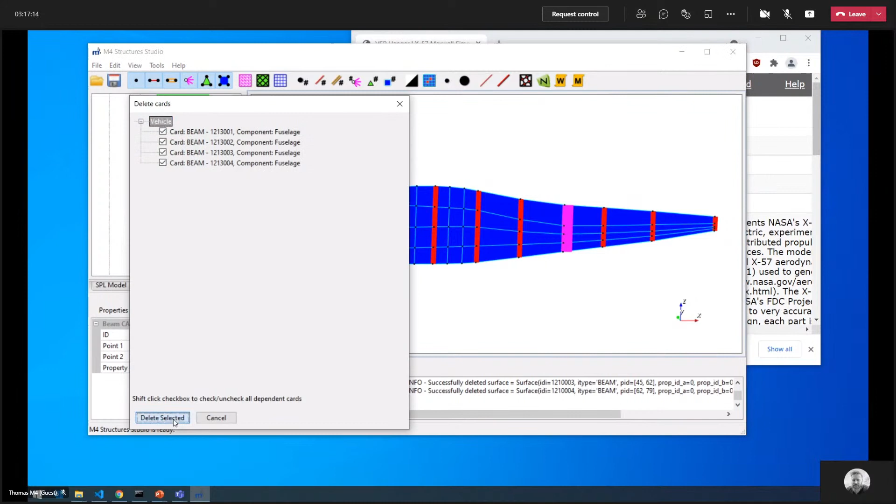And then I'm going to delete the 9,000 and 10,000 beams. Delete those. And then finally, I'm going to delete these 13,000 beams. All right, there we go. I don't know if that's how many bulkheads the Maxwell actually has, but it's good enough.

Next, I'm going to work on the wing. So I'm going to show this and snap to. As you can see, the ribs and spars have already been created.

But one thing I am going to add is some concentrated masses for the outboard motors. So go out here, I'm going to do structural elements, attachments, add attachment. And then I can go here, click on the card and the newly created card in the model and change its values. So I'm going to change its CG to 160,

287. So now we have this point out here, but it's just connected to some random point out at the center. We don't want that, so we're going to connect it to these 4 points at the end of the wing here.

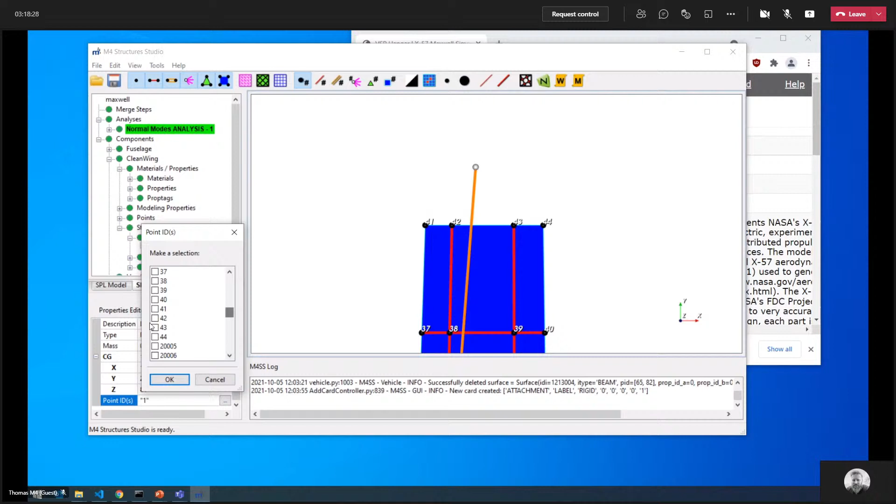So I'm going to change these point IDs. I'm going to deselect point 1 and select points 41, 42, 43, 44. Now I'm going to add some mass to it, say 100 pounds, so we have a 100-pound mass connected to the end of the wing here. I'm going to do the same thing for the other side.

I'm just going to copy and paste this attachment, creating another one over top of it. I'm going to change the Y value to -200, so now it's over here. Then I'm going to change the points to the symmetric points, so instead of 41 through 44, it's 20,041 to 20,044.

So these nacelles could have been modeled explicitly with their own components, but I'm just using concentrated masses to model them. Every single nacelle probably should have had its own concentrated mass and rotor, but I'm not going to worry about that right now due to time constraints. I'm just going to leave it to just those two concentrated masses.

Show all. I don't really want to change anything in the horizontal or vertical tail, but as you can see, there's structure already created for them.

The next step is to determine how all these components are merged together, and the first step within that is to determine the order in which the components are merged.

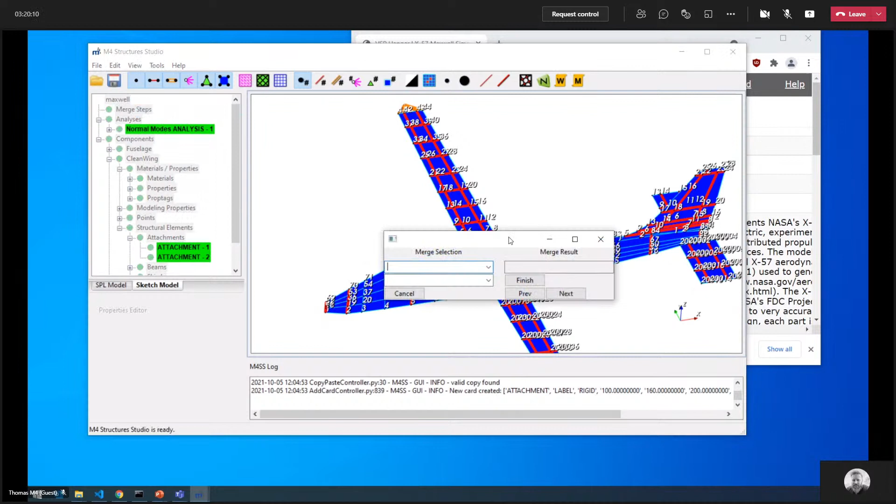If you go up to the merge steps and do the merge wizard, it lets you choose two components - the first two that are going to be merged together. I'm going to merge the fuselage to the wing. You hit next, and then you have this fuselage-wing component. That's going to be merged to the horizontal stabilizer next, and then those three components are going to be merged to the vertical tail next. Then you hit finish.

As you can see, 3 new merge steps were created. Just to reiterate, the first merge is between the fuselage and the wing, then those two components are merged with the horizontal stabilizer, and then those 3 components are merged with the vertical tail. The order isn't that important for merging this vehicle, except you probably don't want to start by merging the horizontal tail to the wing, for example, as they don't touch.

So the next step is to determine how all these things are merged together. We're going to be using a stiff spring method rigid card to merge them together, but in order to do that, you need to create attachments where they're going to be merged together.

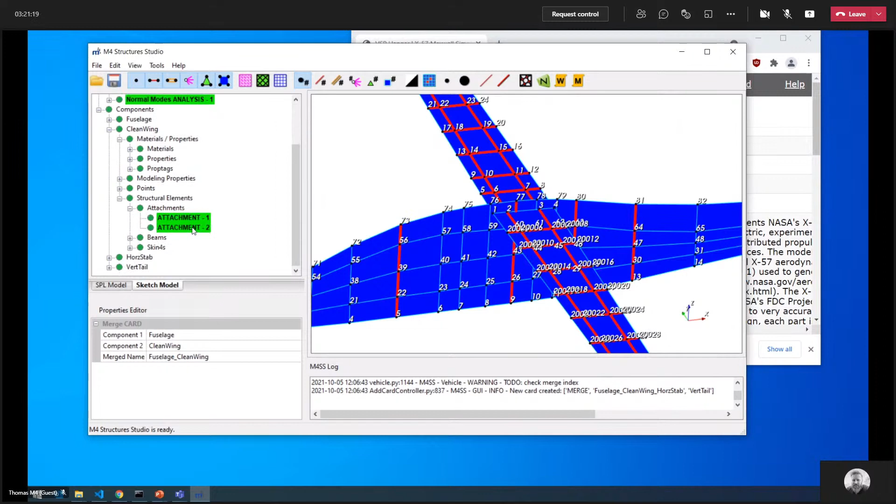I'm going to start with the fuselage and wing attachments. For the fuselage, I'm going to add an attachment at 160, 0, 90, so it puts the point about there.

Then I want to have it connect to points 59, 60, 61, 62 - that's the 4 points here - and then 76, 77, 78, 79. Oh, I need to remove that first point. So then we have this connection here for the fuselage where it's connected to these 8 sketch points. That basically means it'll be connected to the elements created in the FEM at those sketch points.

I'm going to do the same thing for the wing - create a new attachment for the wing, and put this at the same location as the fuselage attachment, 160, 0, 90, so it's on top of it. Then I'm going to connect it to the wing points 1, 2, 3, and 4. Now we have that wing attachment, and then we have the fuselage attachment.

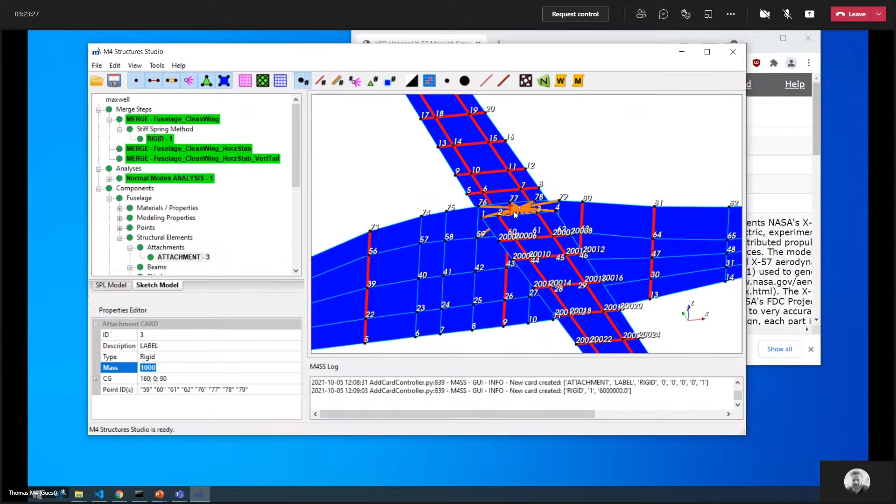One other thing I am going to do is at this fuselage attachment, add 1,000 pounds to represent more non-structural masses that reside in the fuselage, like batteries. Again, probably not in the correct location, but it's close enough for this model, or for this example.

Now I need to do that same attachment connections for the fuselage and the two tail components. For the fuselage, I'm going to add another attachment at 2, 0, 7.5 - that attachment is about there. Then for the points, I'm going to choose 16 and 17, and then 84 and 85, so to those 4 corners. I'm not going to add a mass to this one.

So then next I need to do it for the horizontal stabilizer - attachment, add. I'm going to do it at the same location.

I'm going to attach this to both sides of the horizontal stabilizer here, so points 1, 2, 3, 4, and then 1, 2, 3, 4 again. Now it's connected to both sides of the horizontal stabilizer.

Now I'm going to do the same thing for the vertical tail. Attachment add, and then I'm going to connect this to points 1, 2, 3, and 4. So that's just the bottom of the vertical tail.

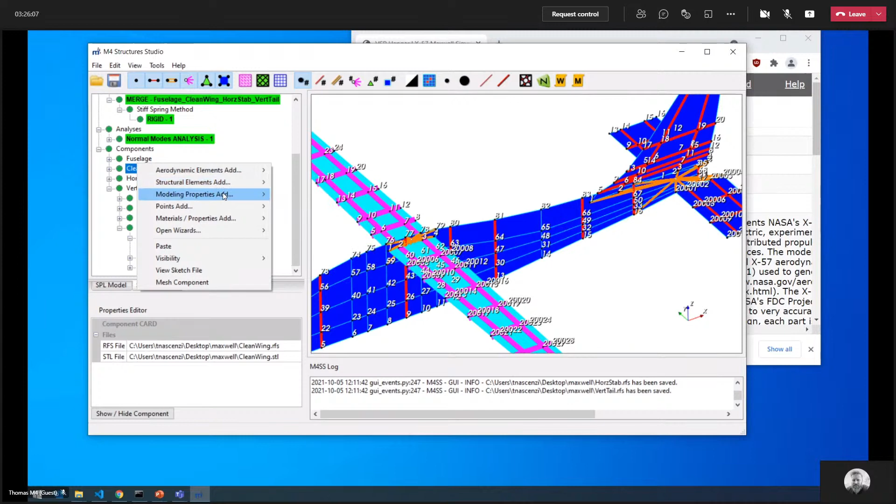Right now all the structural models for this demonstration are done. There's a lot of things I didn't include simply because of time reasons. For example, for the wing, you can add aerodynamic elements such as control surfaces. You can add frames, landing gears, fuel tanks, and many other things, or more detailed structure.

So then we're merged. The last thing I want to do is, by default, a normal modes analysis is created, and you can choose how many modes you want analyzed. I'll increase this to 25. Then I'm going to add a parameter to the analysis, PARAM WTMASS, basically telling the analysis tool what unit system I'm using, so pounds, inches, seconds.

All right, so that's all done. One other thing I'm going to do, just so this runs faster, is change all the meshing parameters. Right now the meshing size is 2, meaning the element sizes will be 2 inches. I'm going to increase this to 20, so a very coarse mesh, and do this for every component.

Mesh size 20. Mesh size 20. Vertical tail, modeling properties, mesh size 20. So now every component has a mesh size of 20, so it'll be very coarse, but it'll run very quickly.

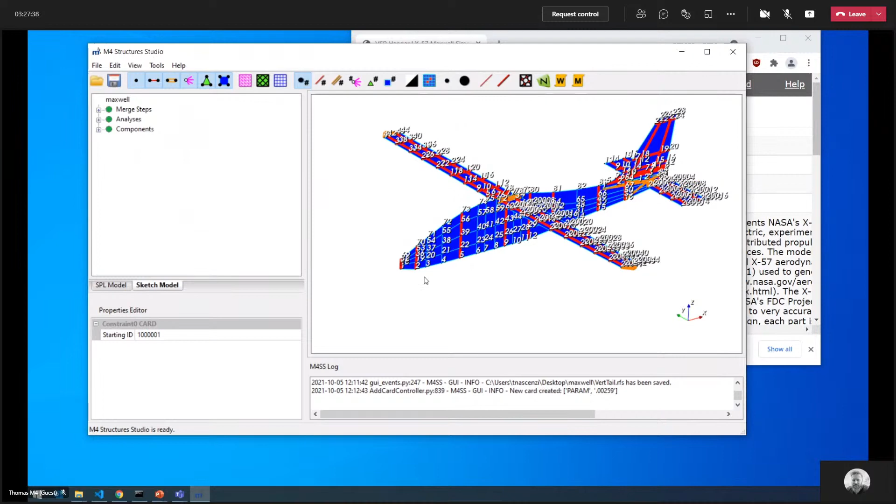Now the model is complete, and we just have to hit this button, and then the FEM will be created with all the through structure and analyses. I'm going to create a folder, PDFs, open it up, select folder. As you can see in the log, I don't know why I didn't make it full screen earlier.

It's currently meshing the fuselage. Now it's meshing the wing, going through every skin element and beam element. Now it's working on the horizontal stabilizer, and that's the vertical tail. Once all those components are meshed, it works on merging them together and then cleaning up any poor elements of poor quality.

This should go pretty quick. And then it's done, FEM complete. We can actually do a preliminary look at the FEM within the tool. I'm going to change this to surface view. As I mentioned, the mesh is very coarse, but you can obviously make it finer if you'd like.

And then we can actually compare this to the OML previously, from the that we've been using from OpenVSP. But right now, this just created the FEM and the analysis.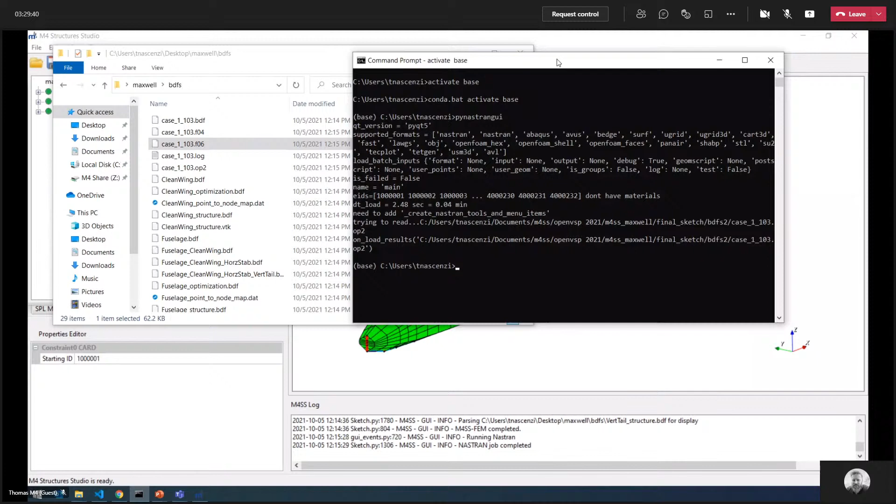So then I'm going to be pulling up PyNastran GUI, which is an open source tool for viewing Nastran BDFs and results, also developed as a side project by someone here at M4 Engineering. I'm going to go to Maxwell BDFs and load this case.

Here's our model. And then I'm going to change the transparency of this so you can see some of the through structure. So you can see these bulkheads created in the fuselage, and then you can see these ribs and spars created in the wings.

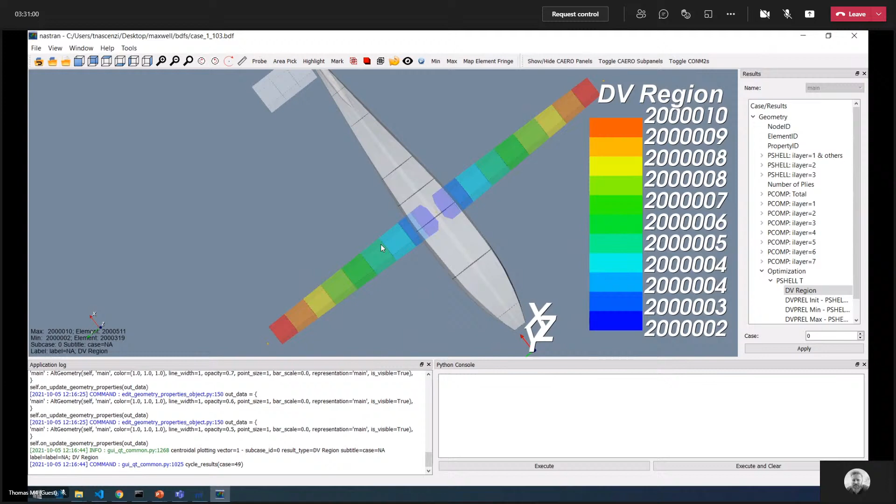And then the other thing I wanted to show was the optimization design variable regions. So if you remember, I had set lower and upper bounds for the wing property regions, and you can see all those different property regions here. But also, like I said, no optimization for sizing was actually performed, so these design variable regions weren't used, but it's just kind of a demonstration of how easy it is to create all these design variable regions for sizing your structure. So then next, I'm just going to load the results.

And so these are the normal modes. First few, there's the first wing bending mode. And then we can actually just animate this for fun, create animation. Let's see how the normal modes for this vehicle look. All

right. And then one final thing I wanted to do was show off the weight statement generator in M4 Structures Studio. So if we go back to M4, and we click generate weight statement, we can select this case 103, generate weight statement. And it'll show you a structural and non-structural breakdown of all the weights in this model. So again, this model wasn't sized, so none of the structural values really mean anything.

But you can see the 1,000 pounds we added to the fuselage plus the 200 pounds for the outboard motors that I added. You can also see the center of gravity, the CG location. Then you can also see the different regions. So you can see that all the skins of the wing weighed 403 pounds, or all the ribs and spars weighed 17 and 41 pounds respectively. And then you can actually look at every property region as well by itself. And then if you had run optimization, there's a column here for the optimized values as well.

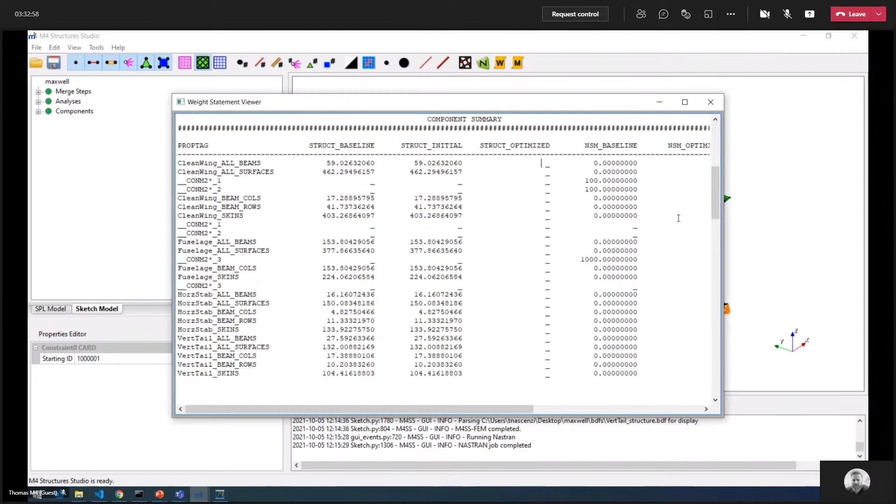All right, and so that's kind of the end of my demonstration. Just to reiterate, this wasn't so much how to make the best model in M4 Structures Studio. It's just to really demonstrate how quick and easy it is to make a full FEM model of a vehicle created in OpenVSP.

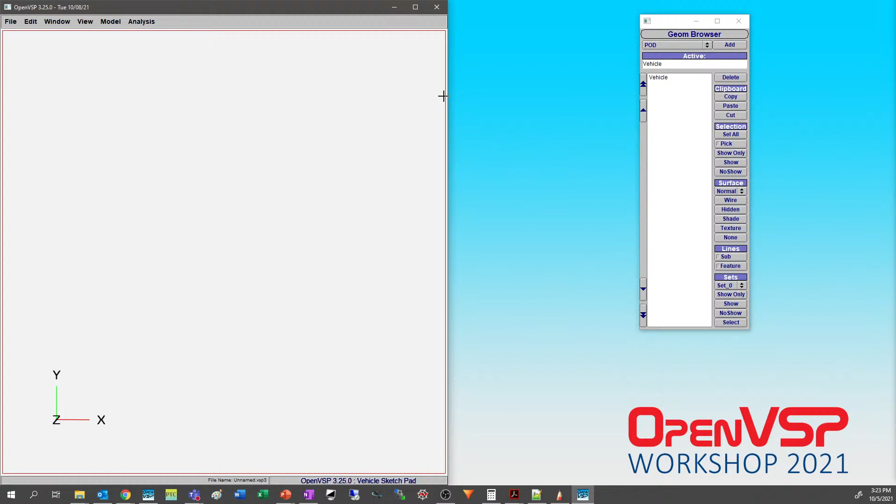But for right now, let me pop out of focus mode so I can get a hold of this thing. And I'll move this to the side, and we can start playing around with a simple quad rotor demo, as long as everything pulls up correctly. Widen this out just a little bit. Okay.

So again, first thing I'm going to do is pop in just regular old propeller geometry, maybe scooch this over so we can see everything that's going on. And I'm going to rotate this in Y. Now here's a fun little demonstration. Notice how it takes a little while to update propellers because you're actually changing things. Even with faster update, there are things that are moving.

So what we can do is we can change from blades to disc. And now if I come back here and start toying around with this, it's effectively real time because it's not trying to loft the blade every time I move it. So we've got this disc mode set up, and we'll give it, let's say, some Y location, and make these each say 5 foot. Why not?

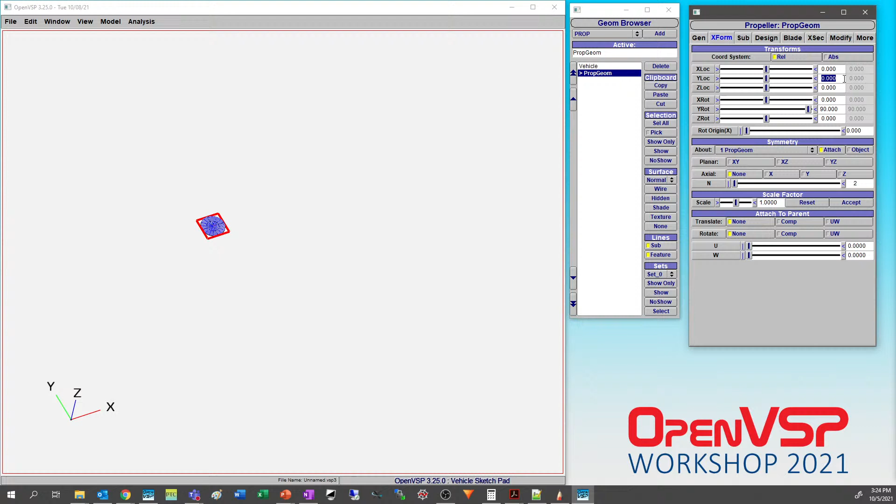Set that up to 10. Give it some XZ symmetry. And while we're at it, let's see if we can do YZ symmetry and move this in X. There we go. So we have 4 rotors from one component. Not too bad. Let's make this -5. There we go. So just for fun, that's all put up. If we go back and go to blade mode again, you'll see that we have our rotors.

In the interest of time, we can come to the General tab and take a look at some of our tessellation. We've got U and W at 12 and 17 right now. That's not too bad. We probably don't need to run 12 sections for this demo, so we can do something more like, say, 9. And then in the More tab is where you have access to all of your clustering.

So in this case, our leading edge and trailing edge is already set up for VLM mode. We can leave the root down at 1. Let's say bump that to 0.25 for our tip clustering. And we could give it a little bit more in W, but for the sake of time, let's just let it run.

So notice here that we have all of these propellers set up around this central axis where this is effectively where the component is attached to, and we've moved it over here. But we've got the thrust vector. So the blades are all turning in this direction, and the thrust is pointing up. So we can tell that as these things rotate around in their normal direction, they're going to be trying to lift this fake body off the ground.

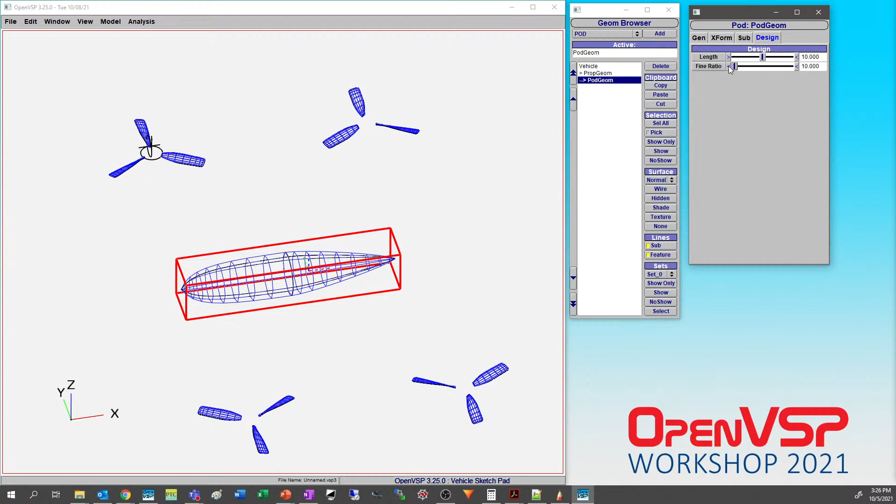So we can do something like drop a pod in here, and we can bring it forward a little bit, maybe bring the fineness ratio down, make it a little chunky, maybe 5, why not? So this is a really big quad rotor, but let's just see what happens here in a minute. And, you know, for no reason whatsoever, let's pop in a simple wing just to have a little fun.

Brandon, when you apply symmetry, it will cause the opposite rotor to rotate the opposite direction when you do planar symmetry. And so these will actually rotate the way they should for a quad. If instead you use radial symmetry, say you wanted to do a hex, because of the way radial symmetry works, they would all rotate the same way. So you would be better off doing 2 sets of 3, or a set of 3 and applying radial symmetry for 3 and planar symmetry to get the reflection to 6. Yeah, that's a really good point to make.

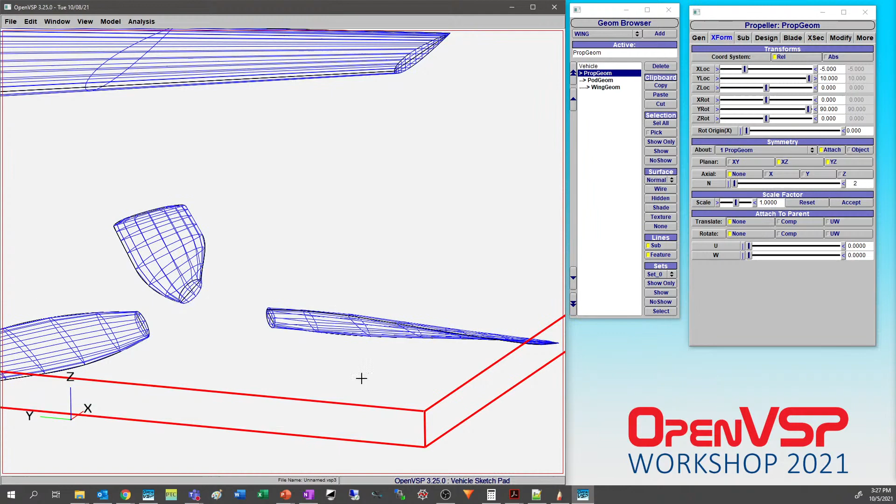So while Rob is talking about that, you'll notice that each of these, because of the way that OpenVSP interprets the way that they need to turn, you'll see that this one is going to be turning the correct direction. This one's turning back the other way. So they are all symmetric to one another. If, however, we turn this off and turn on, say, Z symmetry, they are all turning right hand.

And so as we increase the number here, I hope I didn't just crash VSP because I tried to, yep, there we go. Overkill. Let's try and type in 6 and make sure I don't hurt myself. So all of these are turning in the same direction, and that's not exactly what you want. So let's go back to none and turn our symmetry back on here, and we'll jump into VSP Aero and start playing around with some of these settings.

So we'll run VLM and let it go ahead and move fast. We only need to do one of these, maybe just a small alpha. Give it some forward velocity and use that to normalize everything. So under the Advanced tab, I'm going to give it all of the physical processors that I've got, and we'll do 64 wake nodes and some far field distance of, say, 100 to give the wake some time to kind of bend and do things. And we'll turn rotating blades on.

So for V infinity, if we're talking about a Mach number of 0.01, let's set this to something like, say, 30. And then for VREF, because we're going to spin these a little bit faster, we can set it to something like, say, 450 and 0.4. These numbers aren't going to be exactly right because I'm just kind of eyeballing it.

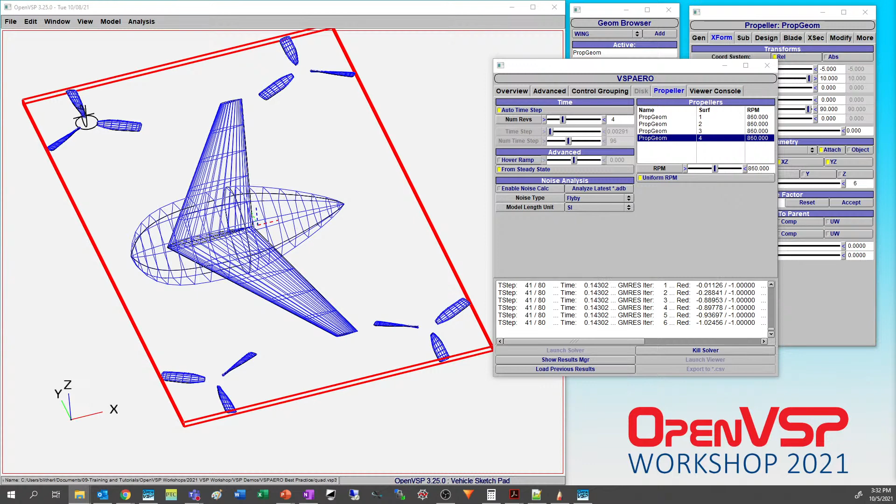Let's see here. That's there.

So while that's kind of running in the background, we'll take a look at these files. Let me move this out of the way so I can make sure everything's still working well. So here's what we're looking at as part of the dynamic files. So we've got the VSP Aero file, which is the input to the run itself. The groups file is what designates everything as either a fixed or a dynamic component or a rotor. And then you've got the group file, you've got the rotor file, so there's rotor 1, rotor 2, and then there's a group 2 file.

So if we pull these up and look at them, this is what the VSP Aero input file looks like for this run, pretty much the same as any other run, except down here where it talks about time steps. When time step is -1, that's telling it to use auto time stepping. And when you have -4, that's saying use 4 rotations of the unsteady rotor.

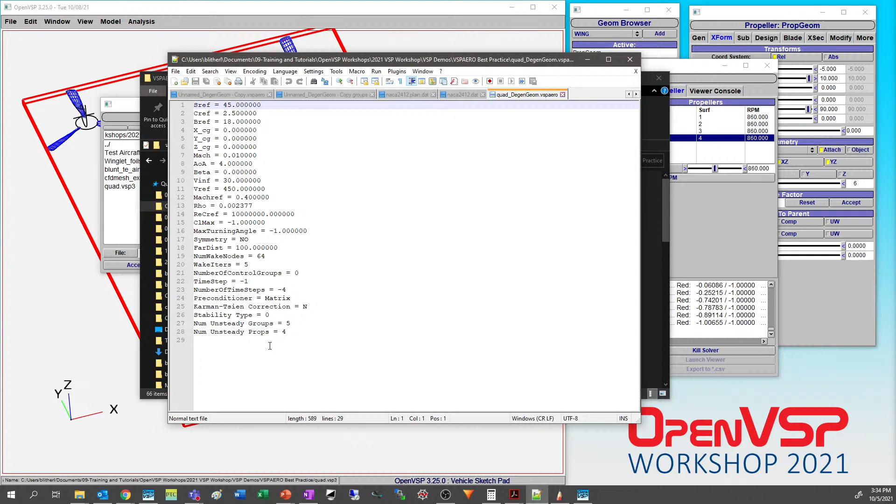If we take a look at the groups file, not to be confused with a group file, groups with an S, this is where it defines each of these components. In the fixed group we've got 3 components, including both the left and right side of the wing and the pod. We identify those components here, and it says the geometry is fixed. You can specify the orientation, but because it's fixed, all of this can be 0 — that's not a problem.

Below that you have each of the propeller components. It identifies how many, what it belongs to, whether it's a rotor, and then things like the diameter, the origin, so where it's located in space, what rotation vector is attached to that, and the omega, or the rotational velocity. Each of these are automatically generated from the GUI, but if you need to go in and change them manually, you're welcome to.

So here we see that our run is complete. We're back to load distribution, but if we look at blades, we can pick one. Again, here's the load distribution on that blade, and here are the unsteady results. For the thrust, it's got all 4 of the rotors, each of them hanging around 80, 90 pounds.

But what you should notice here, especially with the time history, is that because I didn't really do my homework to make sure all of these were posed very well, over time we start to get noise in this. You can see how these are starting to shake and cause a little disruption out here. If we ran this even further, we'd probably see these start to grow. What's going on is, one, the mesh or grid is kind of poorly refined, which we already knew, and two, the time stepping, RPM, size, and everything I gave it is probably a bit unrealistic.

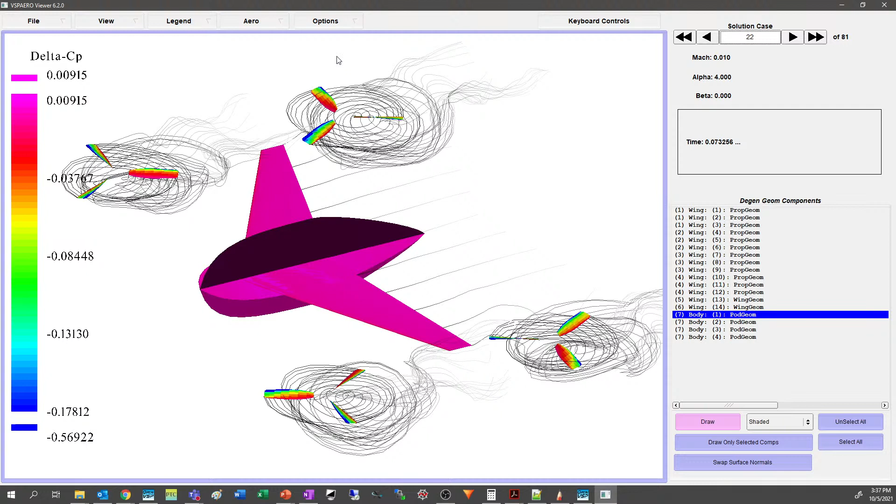As we step through, you can see that initialized wake starts deflecting and deforming. This wake out here at the wingtip is getting sucked into this propeller back here, same story back here, and all of this stuff is kind of interacting with each other. We're kind of clipping through, and we only ran this for 4 rotations, so keep that in mind as we blast through these solutions.

We only had an angle of attack of 4 degrees, but we're only going about 30 feet per second according to our input, so we're not going very fast. You can see the wakes are kind of pushing down, but they're starting to flip and interact. These are starting to impinge on the ones back here, and we've given it enough time that everything in the model is starting to interact, which is where some of that noise is coming from.

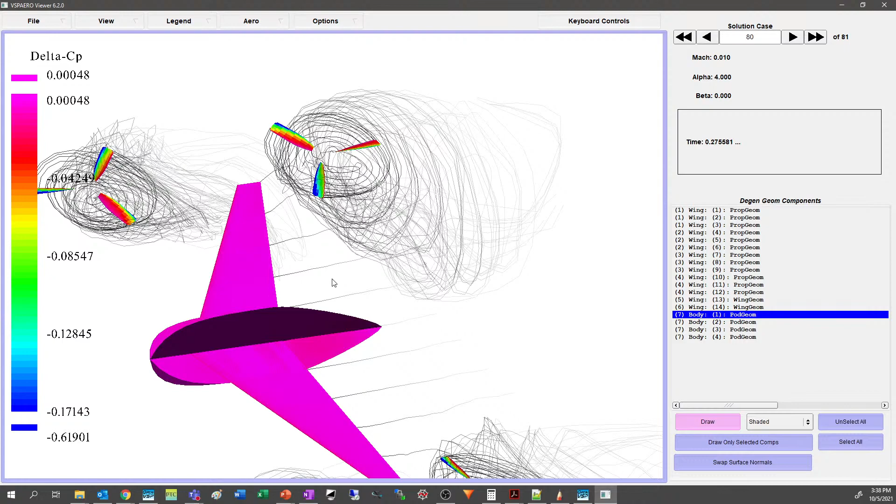But in the interest of how long time has advanced in the model, we only gave it, say, 100 in the far distance. You can see the wing wakes are fading out into nothing right about here. If this were going quite a bit faster, if we gave it a far distance of maybe 500, we would probably see these wing wakes a bit farther out.

What we did is start everything out as if it was moving, fine with that initial steady state solution. And when we turned on time stepping, we only let it advance a very small amount of time, because now we're on a rotor time scale.

Some people will occasionally ask, can we do things like control surface response for unsteady rotor analysis, or can we do a transition run, things like that. Yes, technically, but you're talking about two completely different time scales - 10,000ths of a second or even smaller depending on rotor size and RPM, versus a few seconds to even 30 seconds to tilt a wing. So the time scales are hugely different, and that in part is where that quasi-unsteady stuff that Dave was talking about can be really handy. So keep that in mind as well.

So I'm trying to remember, was there anything else I was going to demonstrate here quickly, Rob, or was that the one we meant to go back and hit? There was some question earlier today about arbitrary motion. But I think that's probably pretty complex to set up right now. Maybe work on something offline and have it canned so you can do a quick demo later in the workshop.